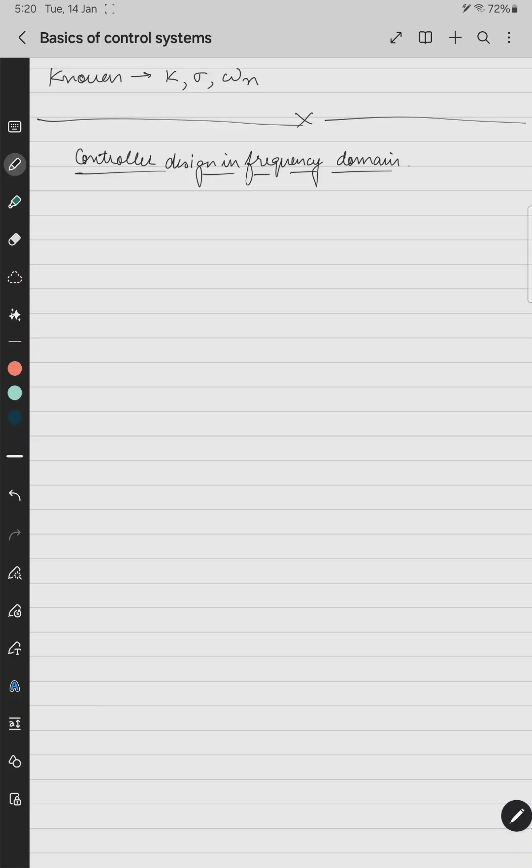In the last lectures we have seen how to design a controller in time domain, considering time domain specifications like a given rise time, a given settling time, a given overshoot, and based on these limitations, how to tune the KI and KP parameters for first order and second order systems. We have seen that by substituting some inequalities and solving them, we can get the desired converter response by ensuring that the closed loop response is stable, achieving the desired steady state error and desired transient responses - rise time, settling time, and overshoot.

We also know that as we go on increasing the order of the system or the plant, the inequalities become complex to visualize. For instance, for a second order system with a PI controller, it became overall a 3D graph, basically a 3D complex plane. So in this case, the controller design becomes slightly challenging.

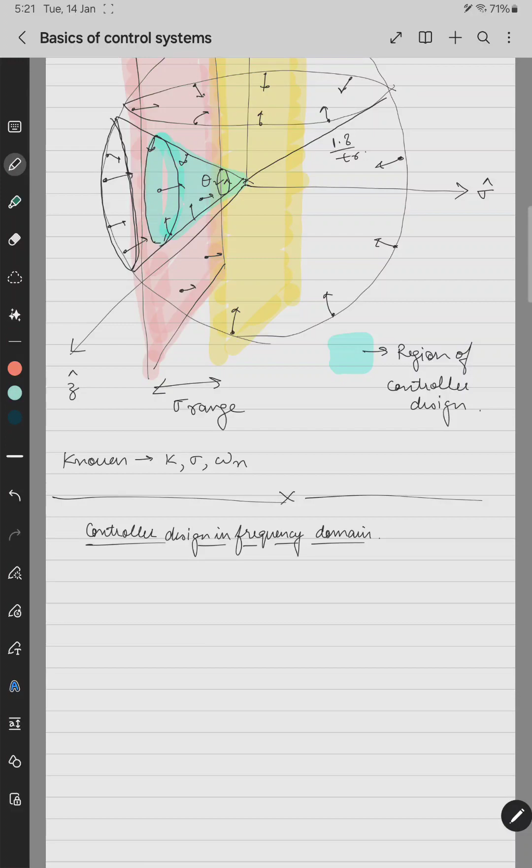That's why people prefer controller design in frequency domain, where you can design the KI and KP parameters by just assuming a given phase margin and bandwidth from the crossover frequency. So we'll start with today's lecture on frequency domain analysis - the methodology to tune the controller parameters using the OLTF.

Controller design is typically based on different methods, like root locus, then frequency domain analysis, which is also called loop shaping analysis or Bode plots. These are the two methods typically used for designing the controller. I think we've already seen in the bachelor's course how to use the root locus technique.

In root locus technique we use the closed loop controller, the overall transfer function for a closed loop system, and then match it with the characteristic equation, keeping the coefficients of all powers of S the same sign, then do some plots to find the KI and KP values. But frequency domain analysis is mostly preferred by power electronic engineers, so we'll be using frequency domain analysis.

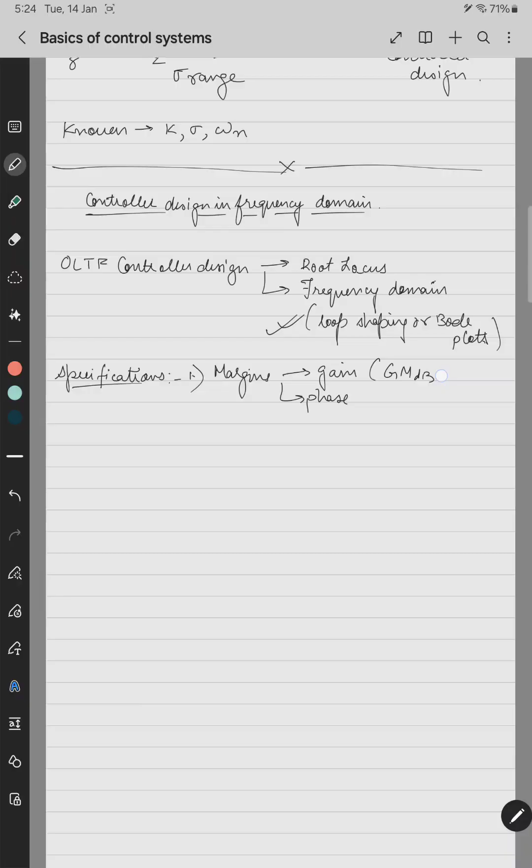So the specifications of frequency domain analysis: the first one is the margins - gain and phase margin. Gain margin is denoted by GM, either in decibels or in absolute scale, and phase margin is PM in degrees or in radians. These are basically the margins.

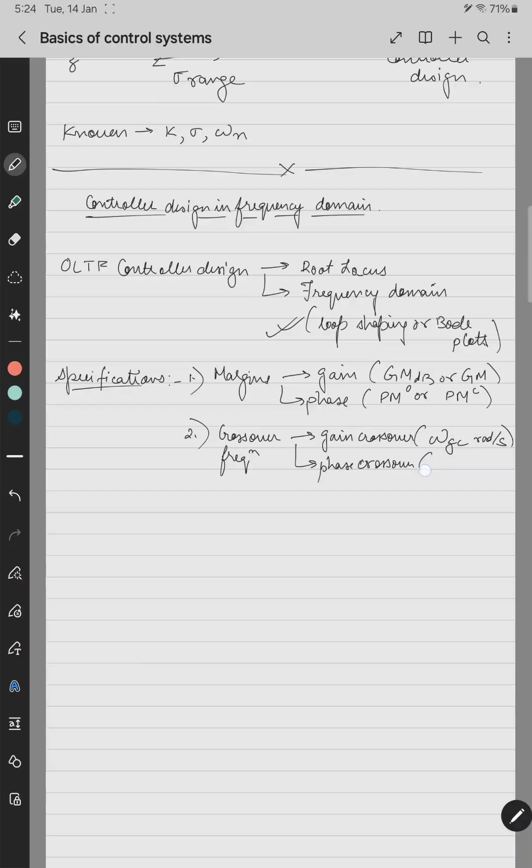The second thing is the crossover frequencies. First is called the gain crossover, omega GC in radians per second, and the next one is the phase crossover, omega PC in radians per second. The last one is the closed loop bandwidth, omega BW of CL. We'll quickly see the definition of these parameters. Let's say G of S is the plant transfer function.

So the first one is the gain margin. Actually, instead of margins, we'll first see the crossover frequencies. Omega GC is the omega at which gain crossover occurs, at which the mod of G of j-omega equals 1, or 20 log base 10 of mod of G of omega equals 0.

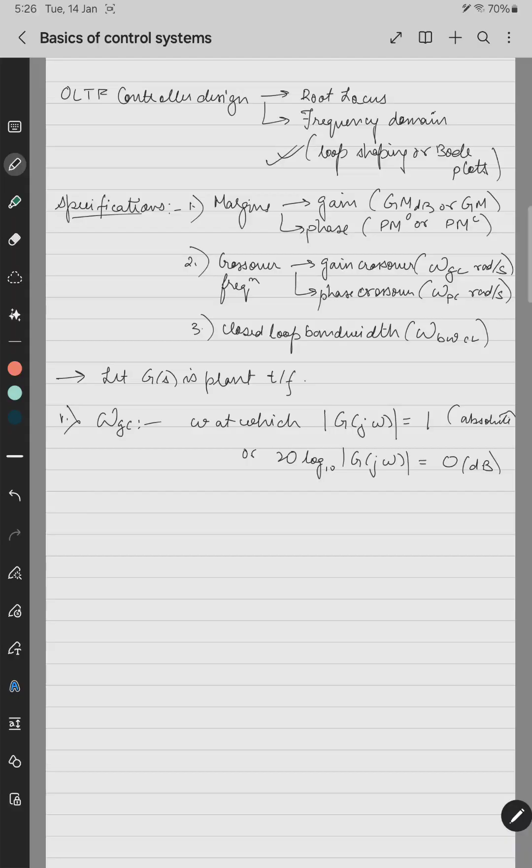This is in absolute scale, and this is in decibel scale - 20 log base 10, the semi-log scale - because in Bode plots we use the semi-log scale for the gain plot instead of the absolute unit. So the gain crossover frequency is the frequency at which the gain plot crosses the 0 dB line, or the value 1 on the absolute scale.

Then comes the phase crossover frequency. Phase crossover is the frequency at which the angle of G of j-omega-gc equals minus 180 degrees or minus pi radians. This is the frequency at which the phase plot crosses the minus 180 degree line, or minus pi in radians.

Then come the margins. First, the phase margin - the definition is the maximum phase that can be added to the plant, G of j-omega, so that the GCL of S, or G equivalent of S, the closed loop transfer function, remains stable.

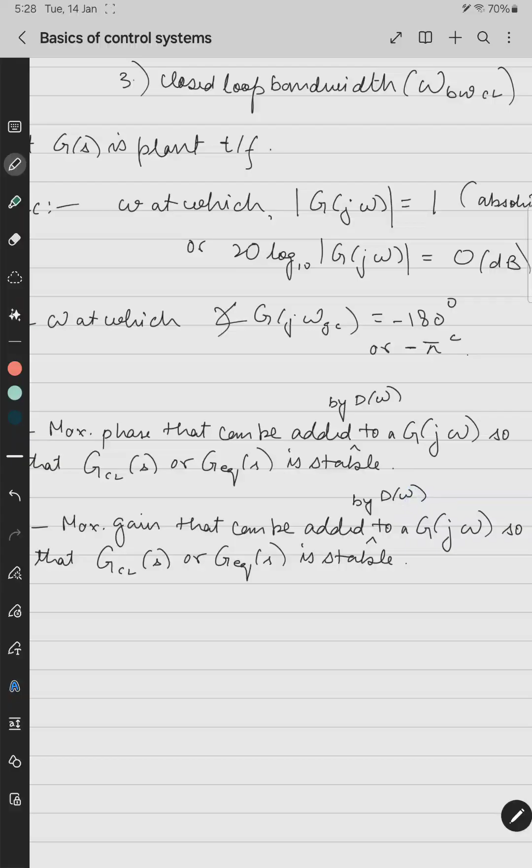Gain margin is the maximum gain that can be added to a plant so that its closed loop response becomes stable. What is the thing that adds the gain or adds to the phase to a plant? I'll write it as a controller d of omega, which can be added by d of omega. And the open loop transfer function OLTF is d of s into g of s. So I'll just pictorially represent what are the gain margin and phase margin.

So let's say g of s is, instead of k by s, I'll write 1 by 1 plus s into tau, where tau is basically the time constant of a low pass filter. So tau is a constant.

So if we write it as g of j omega and separate out the real and imaginary parts, it will be 1 by 1 plus j omega tau. If you multiply by 1 minus j omega tau on both sides, using a plus b into a minus b, a square minus b square becomes plus omega square tau square. So it will be 1 by 1 plus omega square tau square, minus omega tau into j by 1 plus omega square tau square. So what is the gain?

It is nothing but the square root of a square plus b square. So square root of 1 plus omega square tau square, divided by 1 plus omega square tau square whole square. So it becomes 1 by root of 1 plus omega square tau square, this expression.

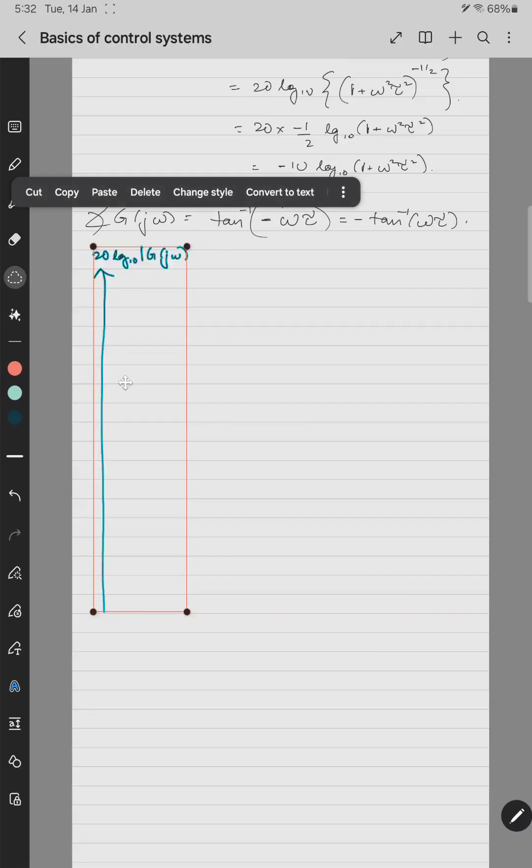Now in order to draw the frequency response plot of this first order plant or the low pass filter, this is 20 log base 10 of mod of g of j omega versus omega. On the same graph, this axis becomes omega, and this is angle of g of j omega. So we have to draw this.

Now what happens is that till this frequency, which is the cutoff frequency where omega equals 1 by tau, the gain will be almost constant, and after that it will start to fall with a slope of minus 20 decibel per decade, because it is a pole. 1 plus s tau is a pole, so the gain will be constant till this frequency, which we call the cutoff frequency, that is 1 by tau. After this it will start falling, so this slope is minus 20 decibel per decade, because it's a y versus x graph and the y axis is in decibel scale.

So the frequency at which the gain plot in decibels cuts to 0 is called the gain crossover frequency. Now let's quickly draw the phase plot of this, since it's basically a first order plant. So substitute omega equals to, initially say omega equals 0, then 1 by tau, omega gc, and some value.

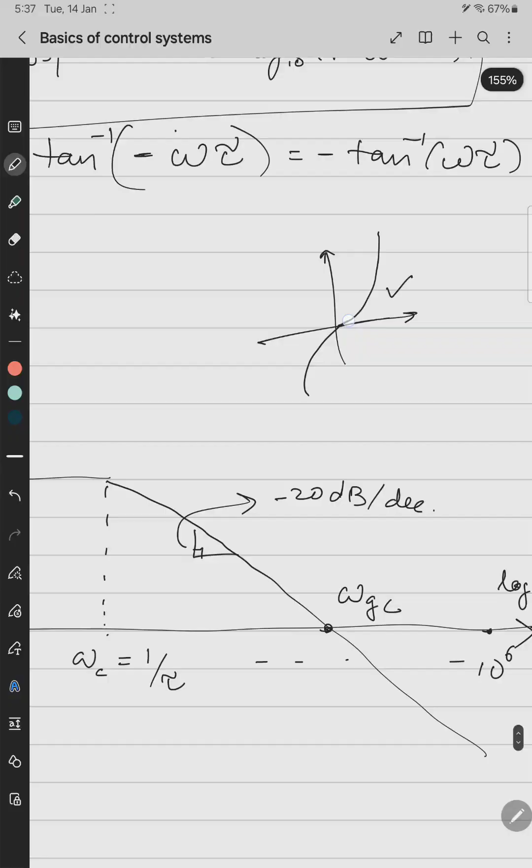So what happens for 10 to the power 0, what is the angle? Tan inverse of 0 is 0. So this is the 0 phase, 0 degree - it starts with 0. Tan inverse function is of this nature. Now we are taking tan inverse of omega - we are not taking this region, we are taking only this right hand side region. So it should rise in a quadratic or cubic term. Basically it's a cubic term, because we are not taking this side, we are taking this side.

This is tan inverse of theta, and this is theta - this is tan inverse of theta. But here the phase falls from 0, it becomes negative because it is minus of tan inverse. So basically multiply a negative sign, so minus tan inverse of theta is like this. It will be somewhat like this. That's why from 0 it is falling like this.

But at omega crossover frequency, meaning at omega gc as 1 by tau, so let's put omega as 1 by tau, so it will be minus tan inverse of 1. That is what angle? 45 degree. Correct - tan inverse of 1 means y equals tan inverse of 1, so tan y is 1. So what is theta? It is 45 degree.

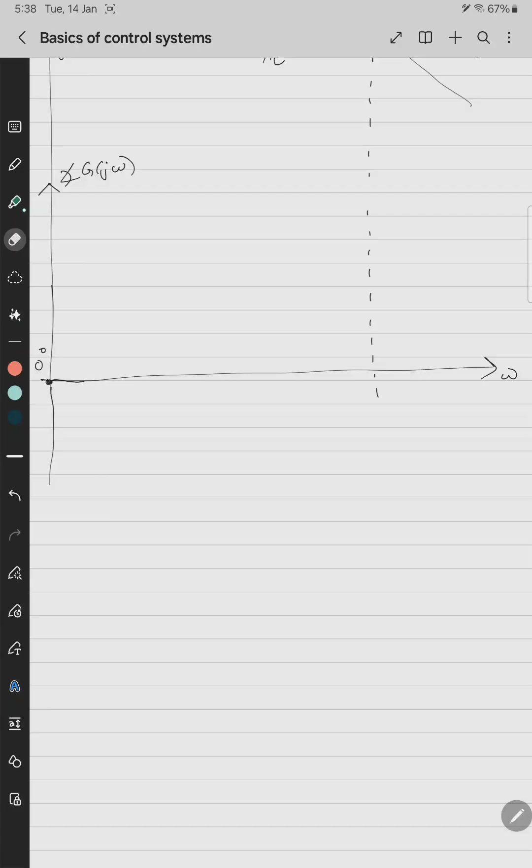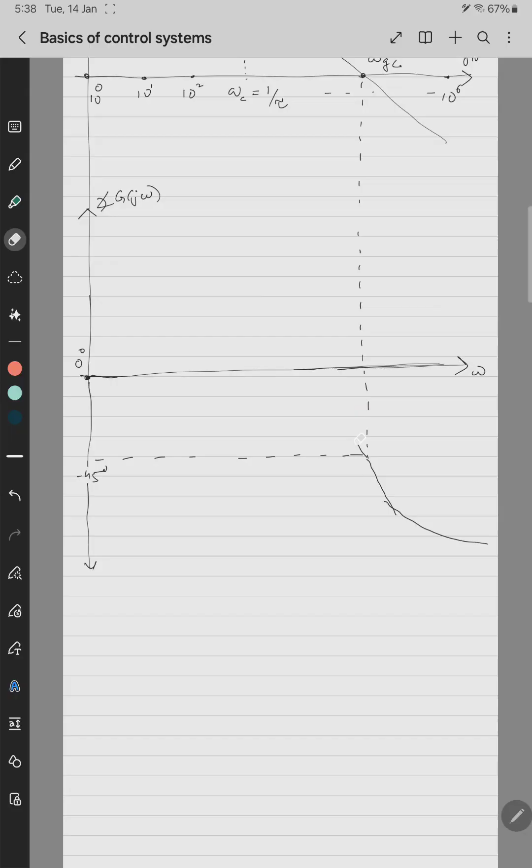So it is like this - it falls. It falls like this, so this is minus 45 degree. Minus 45 degree, and it goes down. And then what happens? As omega becomes infinity, it becomes parallel to this axis. Similarly, it should become parallel to this omega axis. So it will be like this. Okay, I think it's not drawn properly - let me redraw it again.

So it becomes parallel to this. At infinity, what is the angle we have to see? Minus tan inverse of infinity - so what is infinity? When tan becomes infinity, when the denominator becomes 0, so when cos becomes 0 at 90 degree. So it is minus 90 degree. This point is minus 90 degree, this is minus 45 degree, and this is 0 degree. So this is the phase plot - this is the phase plot and this is the gain plot. So this is the gain crossover frequency, and phase crossover frequency is where it cuts minus 180 degree.

Here, so this becomes minus 180 degree - draw a parallel line to this. So this is a special case where this graph does not touch minus 180 degree - it touches infinity. So in this case, omega pc is infinite because it is almost parallel to it. The phase plot does not cut the minus 180 degree line. Phase crossover frequency is infinite. Gain crossover frequency is 1 by tau.

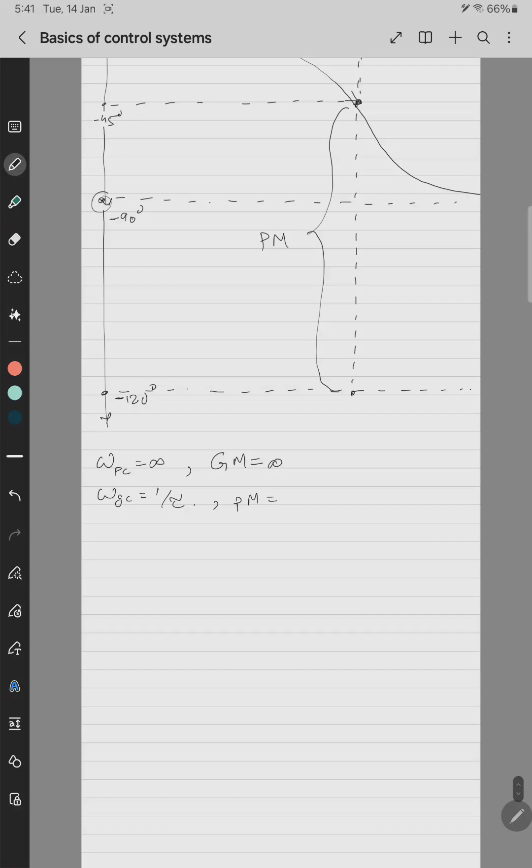At gain crossover frequency, what is the phase margin? Phase margin is this minus this. I'll draw an arrow like this. This is the phase margin. The significance of the arrow is this value minus this value. So minus 45 degrees minus minus 180 degrees, so 180 minus 45, which will be 135 degrees. Positive. Phase margin is positive. Gain margin is infinite. So this is the example of gain margin and phase margin.

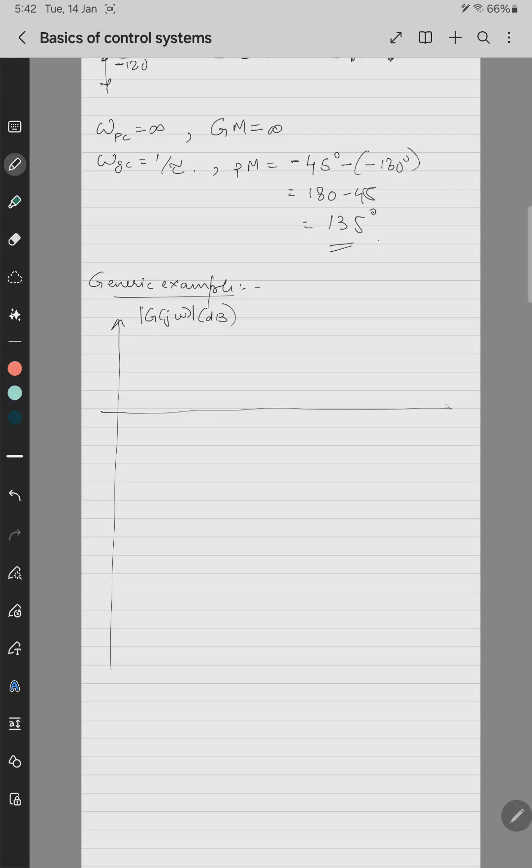Let's see another, a generic example. Let me draw this. This is mod of g of j omega in decibel, meaning it is understood to be in decibel, and this is log of omega. It cuts and somewhere it falls straightly, and then again it becomes flat. Similarly, this is the angle of g of j omega versus omega. So it is like this.

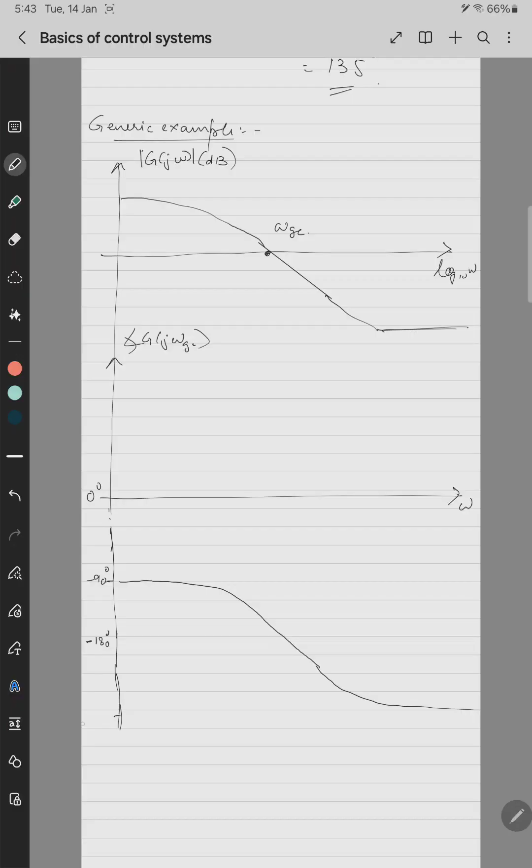This is the gain crossover frequency, and say this is 0 degree, minus 90 degree, minus 180 degree. Say it starts from minus 90 degree, cuts through, and then at minus 270 degree it becomes constant. Say this is just an example. Minus 270 degree is this thing, meaning it becomes flat at this point.

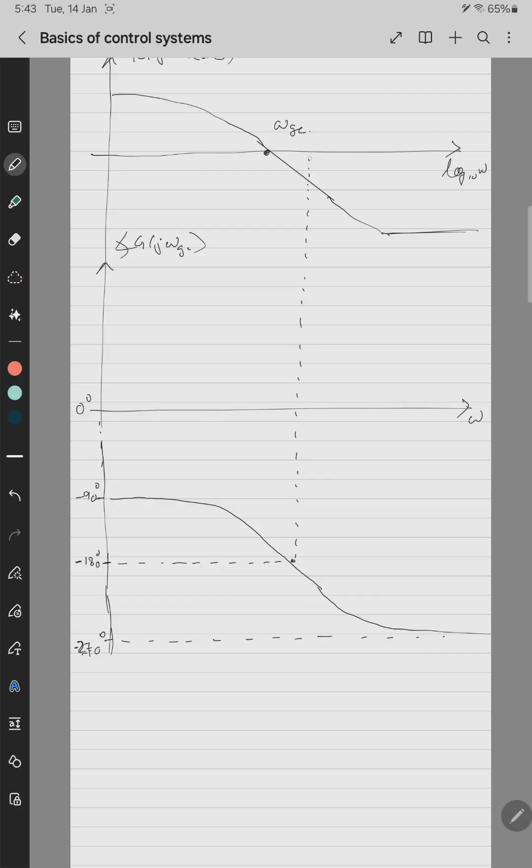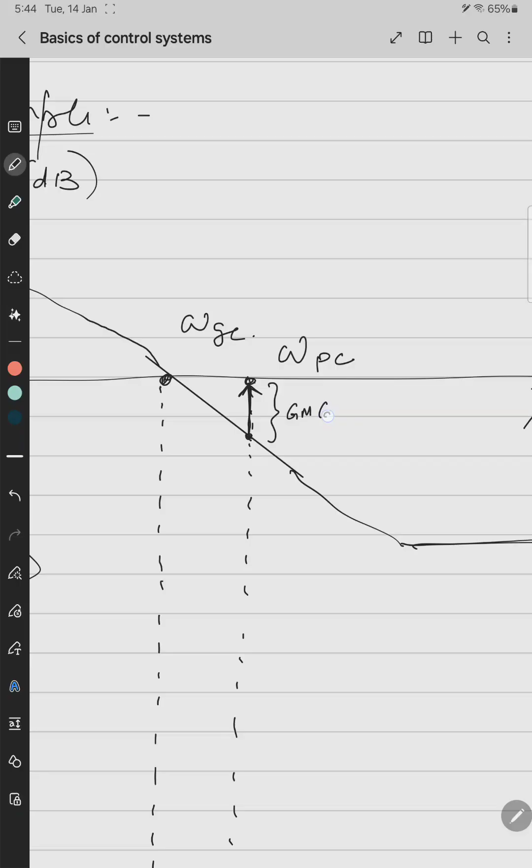So at minus 180 degree, see where the point cuts it, extend it upwards for the gain margin. This is the frequency at which the phase plot cuts the minus 180 degree line, so this point will be the phase crossover frequency. So from gain crossover frequency, extend this graph down and see where it cuts the phase plot, and see how much it is above minus 180 degrees. This will be phase margin in degrees, and similarly this will be gain margin in decibel. So this is the classic generic example of it.

Let me quickly write: omega gc is where 20 log base 10 of mod of g of j omega, where omega is omega gc, becomes 0. At phase crossover frequency, angle of g of j omega pc becomes minus 180 degree. Or you can write it as omega, where omega equals omega pc, like this. Then for gain crossover, the phase margin.

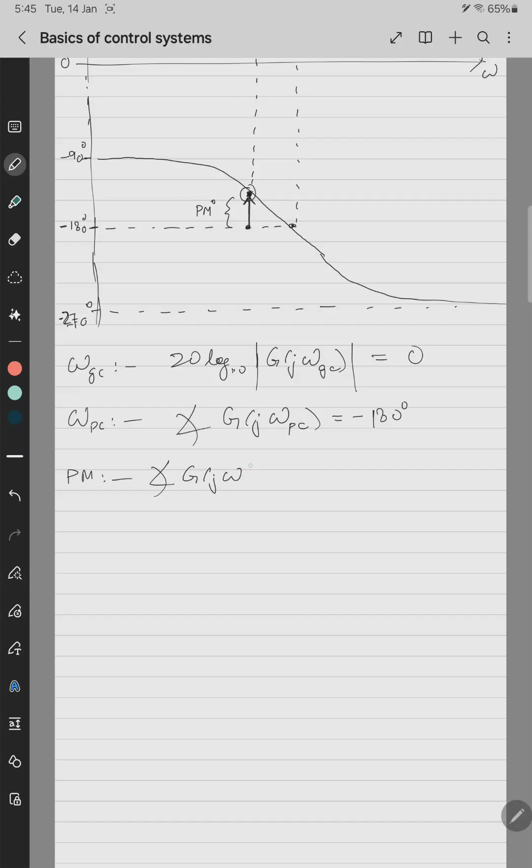Phase margin is what? This point minus this point. What is the first point? The arrow indicates subtract this from this. So what is this point? This point is angle of g of j omega. But what is omega, what is the frequency? Extend the line up, it is omega gc. So angle of g of j omega gc minus minus 180 degree, so it will become plus 180 degree. So this is the phase margin.

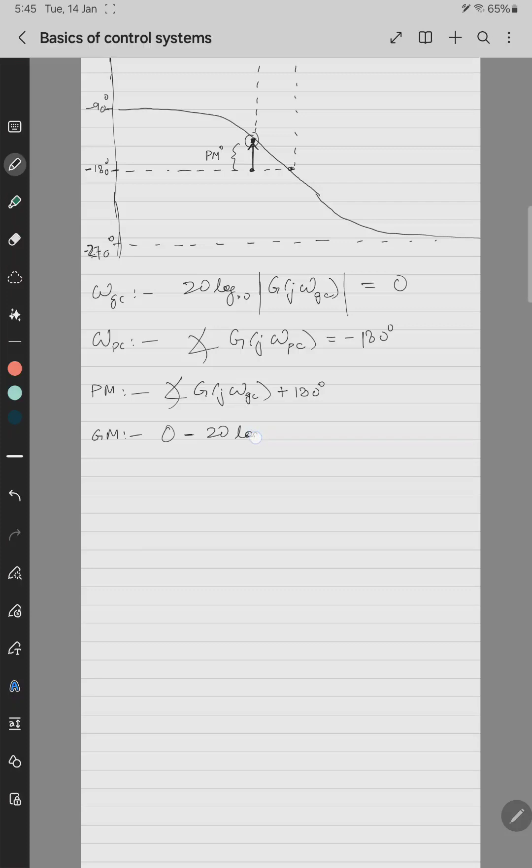Then gain margin, what is gain margin? Again, this arrow, this point minus this point. What is this point in decibel? It is 0 decibel. And what is this point in decibel? This point is 20 log base 10 of this and this, so it becomes 0 minus 20 log base 10 of mod of g of j omega. Now what is omega? Gain margin is at phase crossover frequency, so omega pc.

So these are the definitions of gain and phase margins. Whenever I say the words margins or crossover frequencies, as of now I've considered only a plant, so I know the model of a plant. I have considered a first order plant. I have put s equals to j omega, taken the real and imaginary parts, plotted the gain plot as semi-log versus log axis, and it came out to be a straight line after this cutoff frequency. So omega c is called the corner frequency.

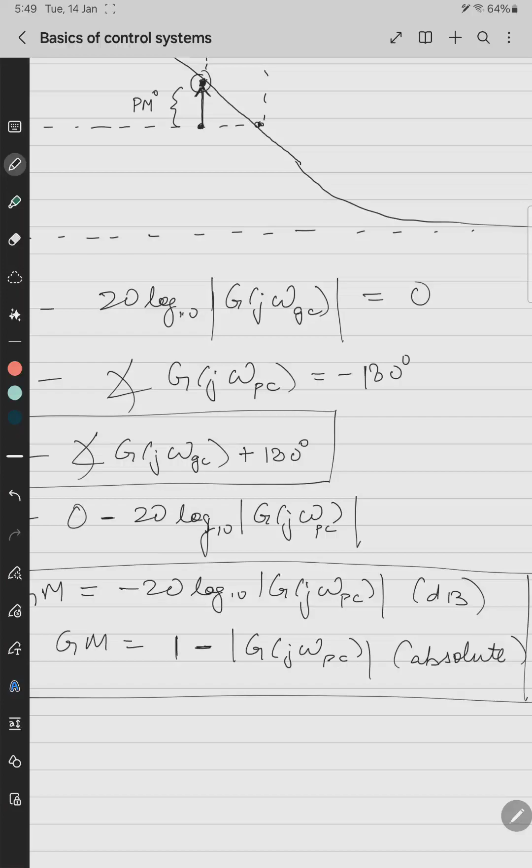Gain margin means this much is the margin, meaning this much gain you can add in decibel. And what is the thing that adds the gain? A controller adds the gain. So d of j omega should add that gain at omega pc.

Similarly, phase margin is the angle of d of j omega. What should that be? That is the maximum of this.

So I can write this: 20 log base 10 of mod of d of j omega, first at the gain margin, so at phase crossover frequency. This should be less than or equals to gain margin in decibel. What I said, gain margin is the maximum gain which can be added by the controller. Maximum means less than or equal to, at the phase crossover frequency.

So I'll write mod of d of j omega pc should be less than or equals to gain margin in absolute, like this much gain I have to add.

Similarly, angle of d of j omega at gain crossover frequency means phase margin at gain crossover frequency. So angle of d of j omega gc should be less than or equals to phase margin in degrees. This is in degrees.

So this is the requirement of a controller, because margin means the value up to which you can add gain and phase at some known frequencies. So omega gc and omega pc are known frequencies.

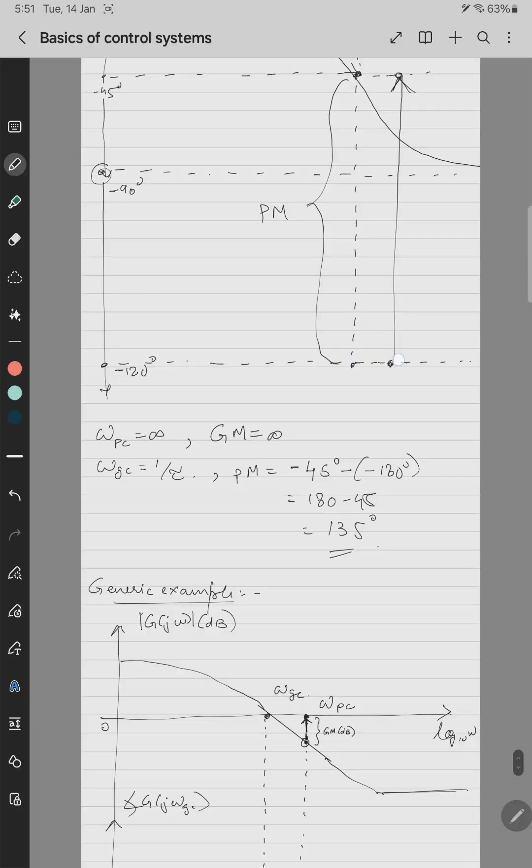Now one more thing: should we consider gain margin or phase margin or both while designing the controller? In this classical example of a first order plant, the phase crossover frequency is infinite, so gain margin is undefined. Instead of writing undefined, I'll write infinite - I'll write undefined.

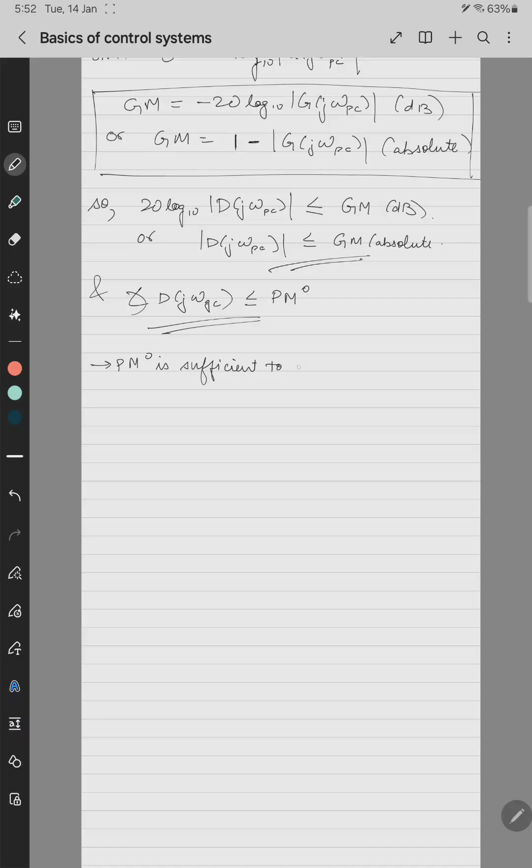So basically phase margin is sufficient to design the controller. There should not be a strict restriction that you should also work on gain margin. Phase margin is sufficient because of this term, because of this special case.

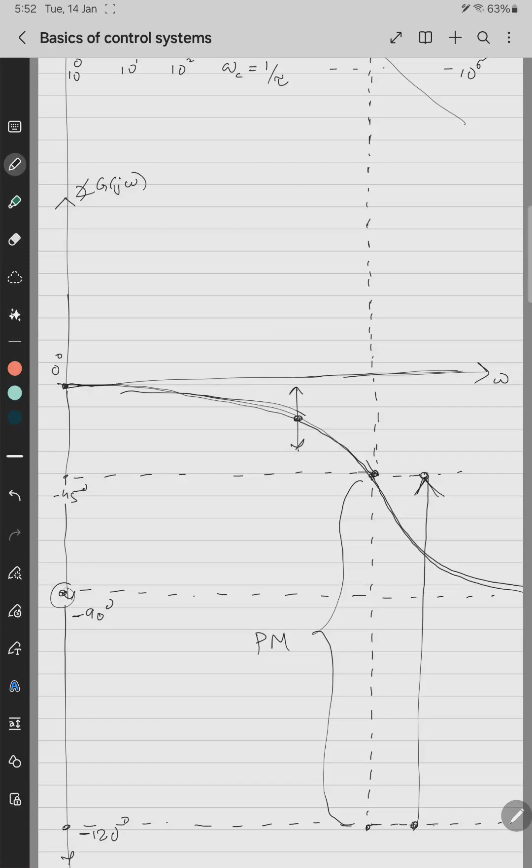So why? Because the phase plot may or may not go up to 180 degrees. Now what is the thing that rolls or shifts the graph vertically? Let's say this is the phase graph. What is the thing that will shift this graph up and down? It is nothing but the integrator action.

So omega equals to 1 by a. There are three corner frequencies: omega equals to 1 by b and omega equals to 1 by c. Three corner frequencies - 1, 2, 3: 1 by a, 1 by b, 1 by c.

So it means there are 4 regions. There are 4 terms here on the pole side. Let's say the zero side is a constant. Or let's have something on this side also: s plus a1, s to the power n, s plus b1 into s plus c1. Then we have 1 by a1, 1 by b1, 1 by c1.

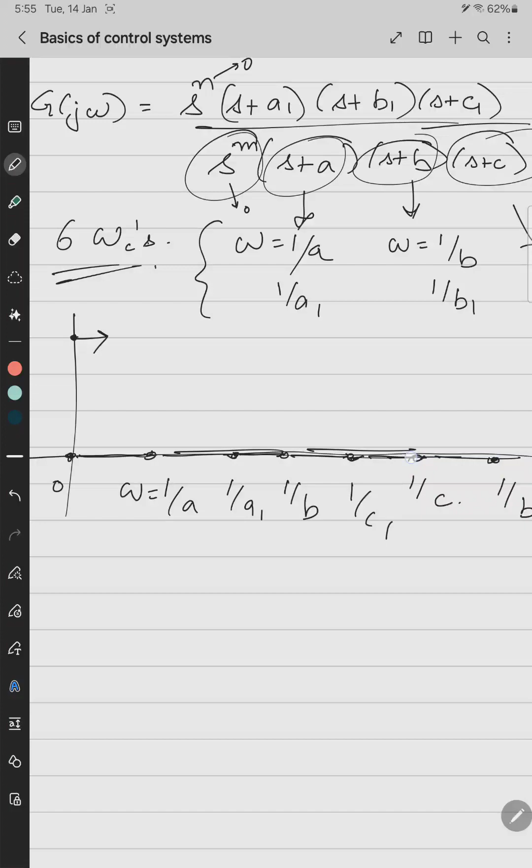And this s to the power m, what is it? It's 0. S equals to 0 and s equals to 0, so 0, 0 will coincide here only. So how many regions are there? 1, 2, 3, 4, 5, 6, and the next one is 7. There are 7 total regions.

At these different regions, the effect of each term will be dominating like this. So between this and this, which term will be dominating among the above terms and which will be taking over, like this it will be there. So from 0 to 1 by a, what happens?

Obviously m has to be greater than or equal to n for a proper transfer function. I hope you all know this proper transfer function. So m has to be greater than n. So s to the power m minus n term will dominate here.

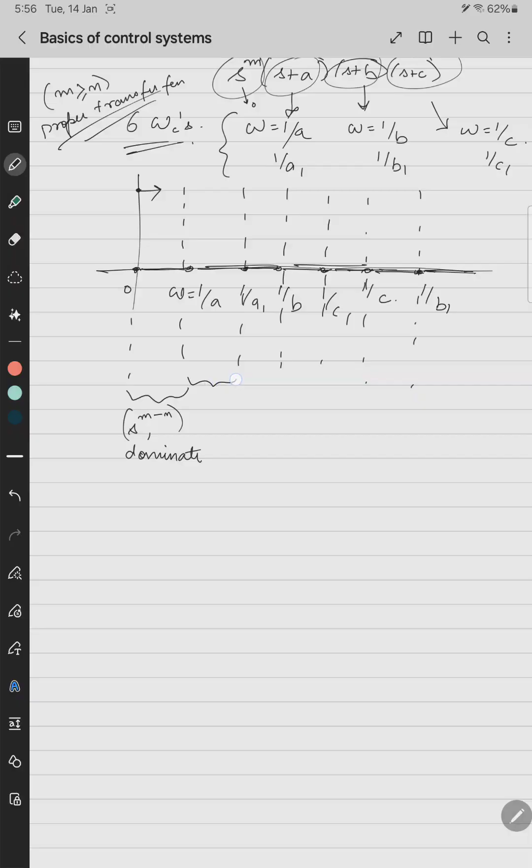Okay, then between a and a1, basically it will dominate here. So basically the gain plot will have no slope, it will have some constant slope, and it will start at some frequency.

Say omega equals to 0. Substitute s equals to 0, omega equals to 0. It will start from infinite, right? From infinite it will start like this, some infinite. That means it is placed at a very far distance here. It will start from here.

After that, what is the effect of the s to the power m minus n term? It has to be a constant gain, so it will be like this. Then after this we have to see the effect of which term is dominant.

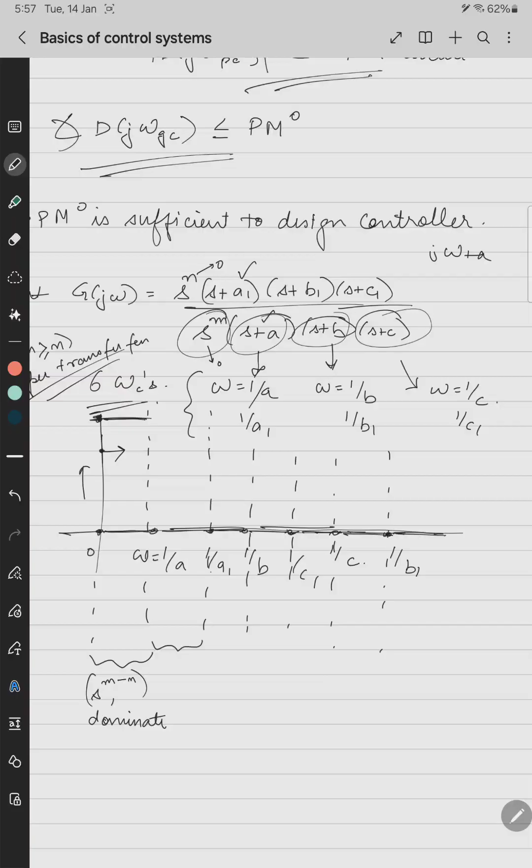So it's between 1 by a and 1 by a1. Take this term and this term. Now you see which is greater than which, and whose slope will be valid. Say a1 is greater than a, meaning the effect of a1 is greater than a, then the effect of the zero will be more than the pole.

So what happens? The overall slope will be slightly rising like this. And then similarly, in the next case, a1 and b: b is greater than a1, so again the effect of this will be rising like this. So basically the effect of the pole will dominate, so it will be rising and then falling at the slope of minus 20 decibel per decade. Similarly, this is how you have to think and plot the gain plots.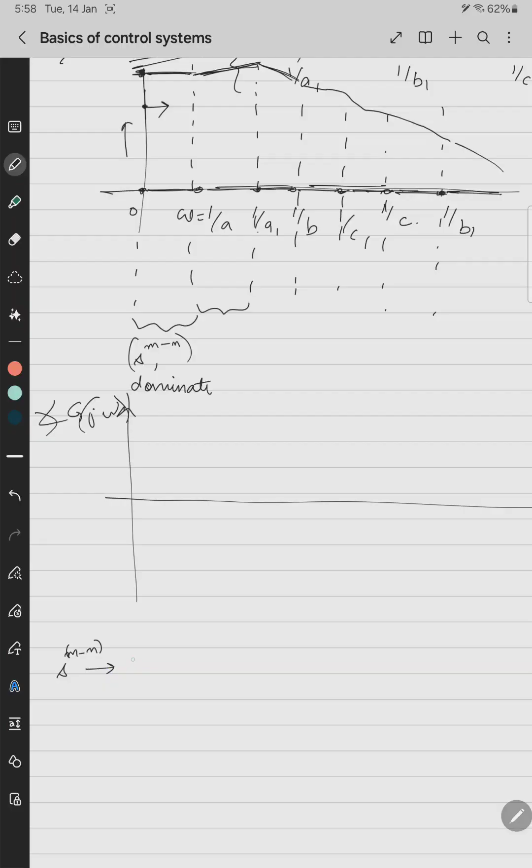Similarly for a phase plot, angle of G of j omega, you have to see how many terms there are. So for the s to the power m minus n terms, it will be minus 90 into (m minus n). I'll tell you what this means. If m minus n... okay, I'll make a table directly.

M minus n, and here I'll write starting phase. If m minus n is 0, meaning m equals n, it will start from 0 degree. If m minus n is 1, it will start from minus 90 degree. If m minus n is 2, it will start at minus 180 degree. 3 means minus 270 degree, 4 means minus 360 degree or 0 degree, and then it goes on repeating.

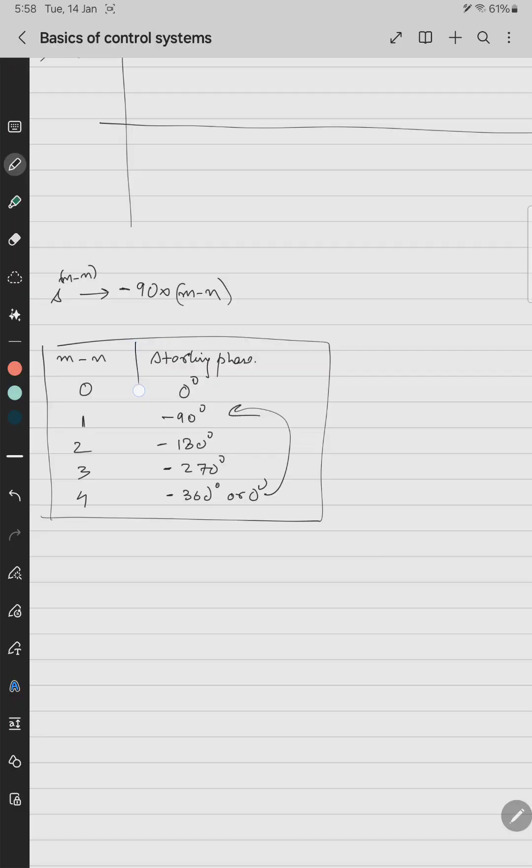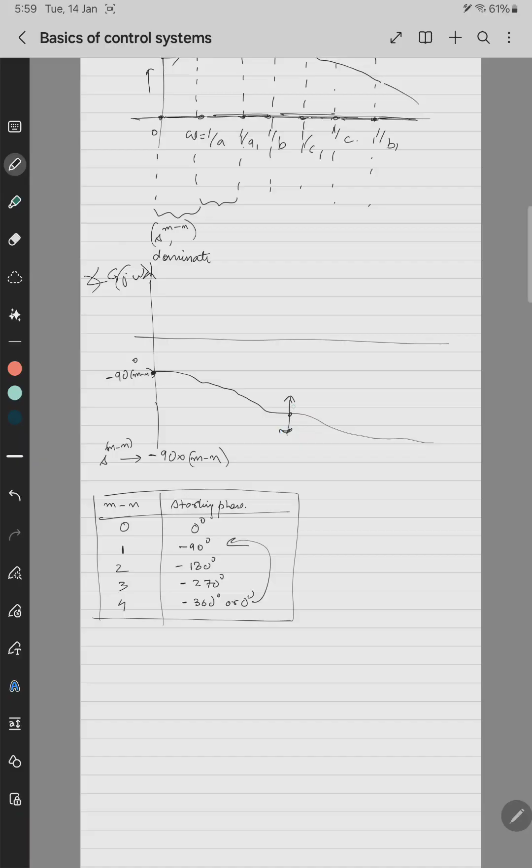This is the thing you should take into consideration. So starting means at what point? This is minus 90 into (m minus n) in degrees, and then based on this, tan inverse of a by... like this you have to do. So based on this, you have to draw the phase plot, and then shift it up and down. By what value it shifts up or down depends on the m minus n value.

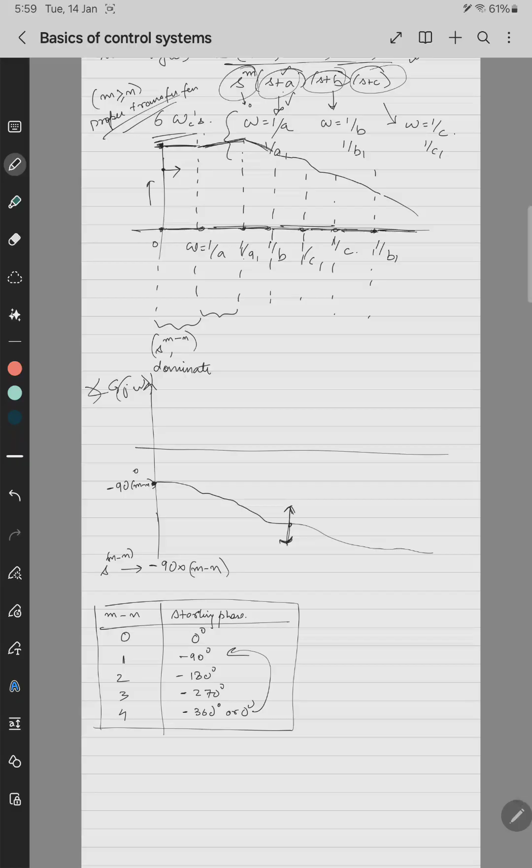So the reason for giving you an example of this type of transfer function is to give you a basic idea of how to draw the Bode plots, gain and phase plots, and also to prove why gain margin is not very essential, because m minus n can be 0. So the overall phase plot may not cut the minus 180 degree line, so the gain margin may be undefined. So even if the gain margin is undefined, you can still design a controller and ensure stability. So enough phase margin is enough to decide the stability. That was the whole idea of this.

So now we have seen gain margin, phase margin, and this. For a given plant, I think you can draw any first order or second order plot and draw the Bode plot, and then basically it's a tan inverse function. So you have to see how to bend the tan inverse function and accordingly draw the Bode plots.

So now we start with the aspects of the controller.

As usual, controller design means the same three aspects which we saw in the time domain. First is the stability.

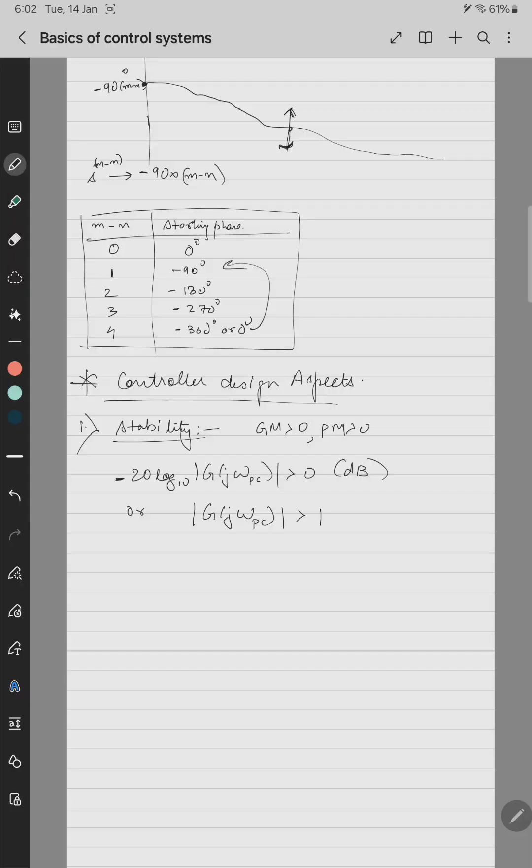For stability, gain margin should be positive and phase margin should be positive. Means 20 log base 10 of mod of G of j omega, gain margin, is at phase crossover frequency. This has to be positive, or in absolute terms, in decibel, mod of G of j omega at omega PC has to be greater than 1. I'm sorry, there is a negative sign here, because gain margin is negative, minus 20 log at omega PC. So then the inequality will be reversed. So I'll directly write, instead of this, it should be less than 1 in fraction, this is in absolute.

And phase margin is angle of G of j omega at gain crossover frequency plus 180 degrees, should be greater than 0. Therefore angle of G of J omega GC should be greater than minus 180 degree. These are the conditions of stability in this controller design approach.

And what is gain margin? Again we can write, gain margin means whatever gain that is added by the controller. We'll write 20 log base 10 of mod of D of J omega PC, the maximum value of it, that is the gain margin. Like this I'll write, phase margin equals to angle of D of J omega GC, maximum of it, because margin is the maximum thing which you can add. Okay, so first, stability, is done.

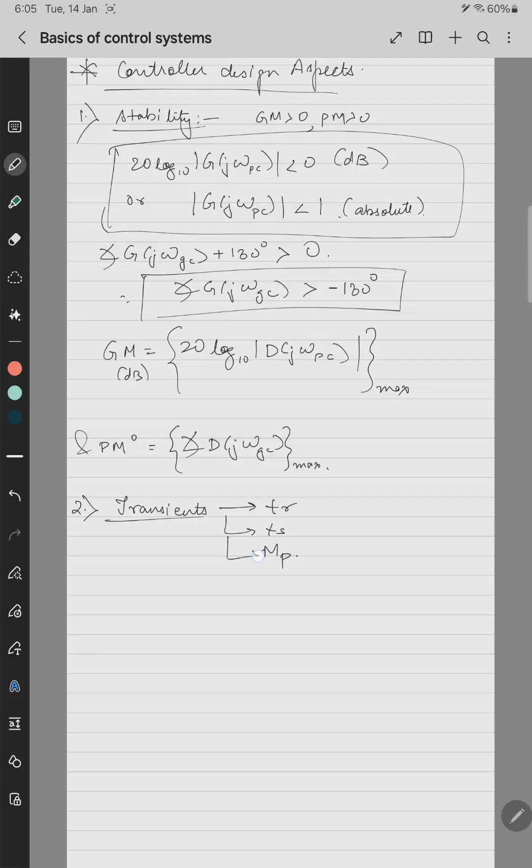I'll directly go to the second aspect, transients, that is rise time, settling time, and peak overshoot. Then, how to correlate these three points with our frequency domain characteristics. So I'll write time domain specification. What are the time domain specifications? Rise time, settling time, peak overshoot. And what is the frequency...

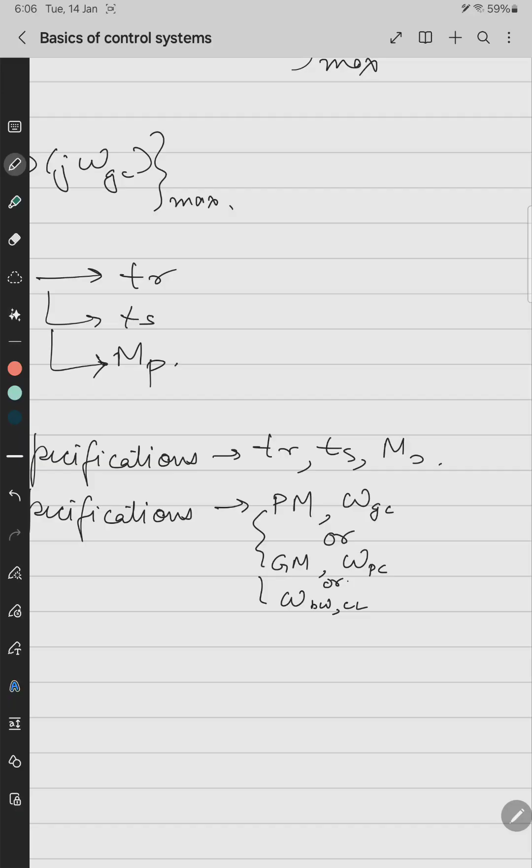Frequency domain specifications are phase margin, gain crossover frequency, or omega bandwidth of closed loop, and maybe gain margin. Because gain margin and omega PC are related to each other, either you should know phase margin comma omega GC, or you should know gain margin comma omega PC, or both. Okay, I think I made a confusion here. Let's erase it. This or gain margin comma omega PC, this or this, and omega BW CL. Sorry, this also goes in OR. Let's see, bandwidth is not needed. Bandwidth is for closed loop, so this frequency domain analysis is only for open loop, meaning loop transfer function analysis.

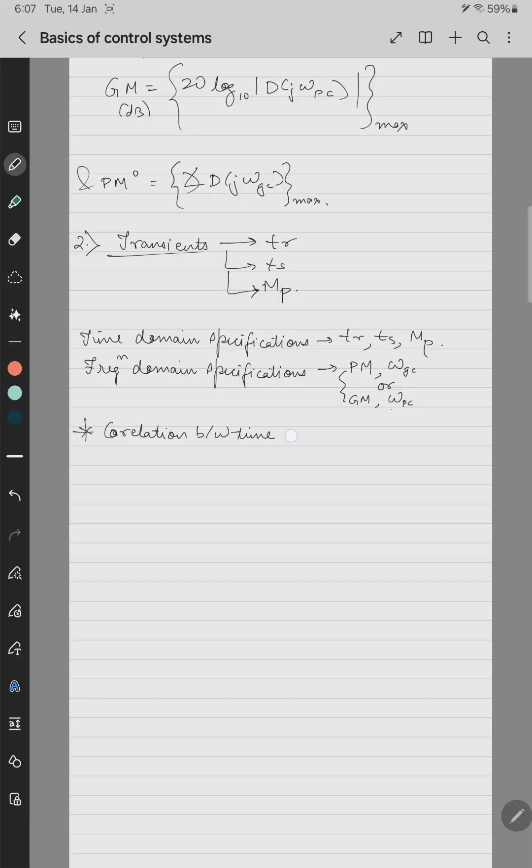So these are the time domain and frequency domain specifications, and we will know how to correlate them. So I'll write correlation between time domain and frequency domain parameters, specifications. We'll see how to correlate each other. The value of Kp, Ki will be same in both cases, but given the controller is designed using different design approaches, what is the correlation between their respective specifications or respective parameters?

Okay, so what we see is that rise time, settling time are a function of phase margin. But what is the function, how they vary, that we'll see. Now also zeta, damping factor, you can write zeta for a second order plant. That depends. Okay, so let's take an example of a second order plant.

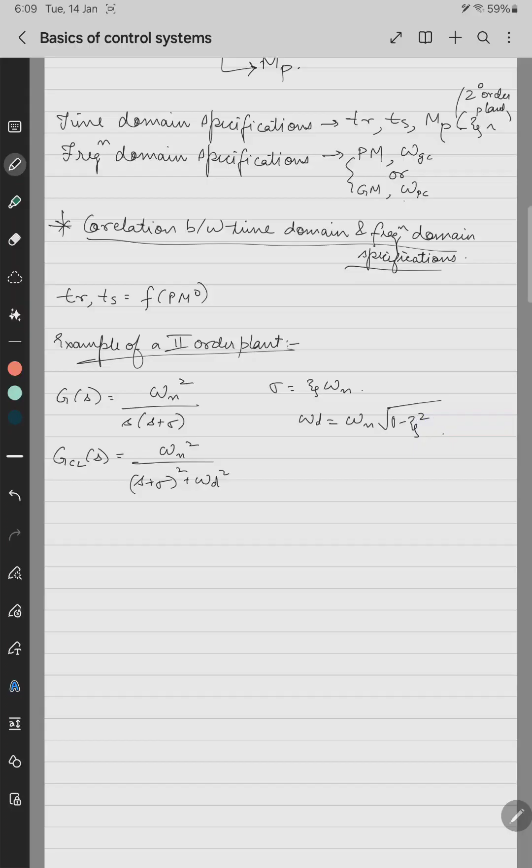The second order plant example which we took in the last class, that is omega n square by s square plus 2 zeta omega n plus omega n square, that is the closed loop response of that plant using unity feedback and without any controller. So I'll write G of s will be omega n square divided by s into s plus sigma, where sigma is zeta omega n. This is the normal transfer function of a second order plant. Now GCL of s is omega n square by s plus sigma whole square plus omega d square, where omega d is omega n under root of 1 minus zeta square. This is G of s without controller.

GCL, this is the GCL of S and this is G of S. So the second order plant should be this when I say a second order plant. So then we'll see what are the crossover frequencies and then margins. So first we'll find omega.

Gain crossover frequency. For omega gain crossover frequency, what is the thing? Mod of G of j omega. Okay, first let's calculate the margins.

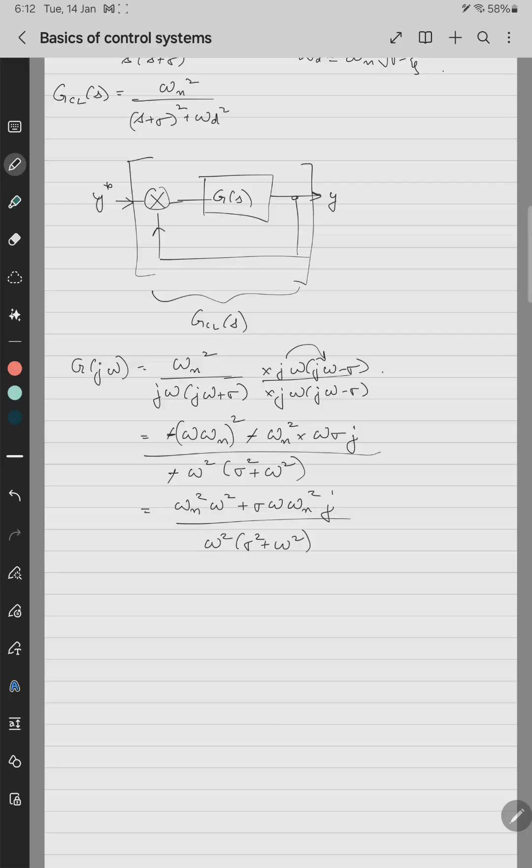It will be a square minus b square, sigma square plus omega square. So what happens? The minus will get cancelled, so it will be omega n square plus sigma omega n square j divided by omega square into sigma square plus omega square. So it will be omega n square divided by sigma square plus omega square plus...

sigma omega n square by omega into sigma square plus omega square into g of j omega, and the angle will be tan inverse of... this will get cancelled, this will get cancelled, so it will be tan inverse of sigma by omega.

And from this, what is mod of g of j omega? It will be under root of omega to the power 4 plus sigma square omega to the power 4 divided by omega square into sigma square plus omega square. So it will be...

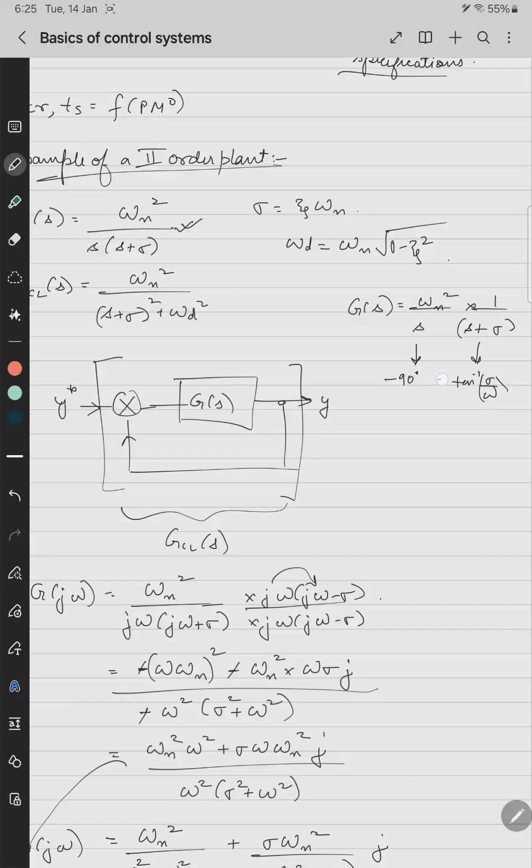Actually, there is some problem here. It should be minus 90 degree minus of this. Why? Because g of s you can write as omega n square by s into 1 by s plus, I think it is 2s plus sigma. So angle of this is minus 90 degree and angle of this is tan inverse of sigma by omega, minus sigma by omega. So just add this. So there is some mistake, it should be minus 90 degree.

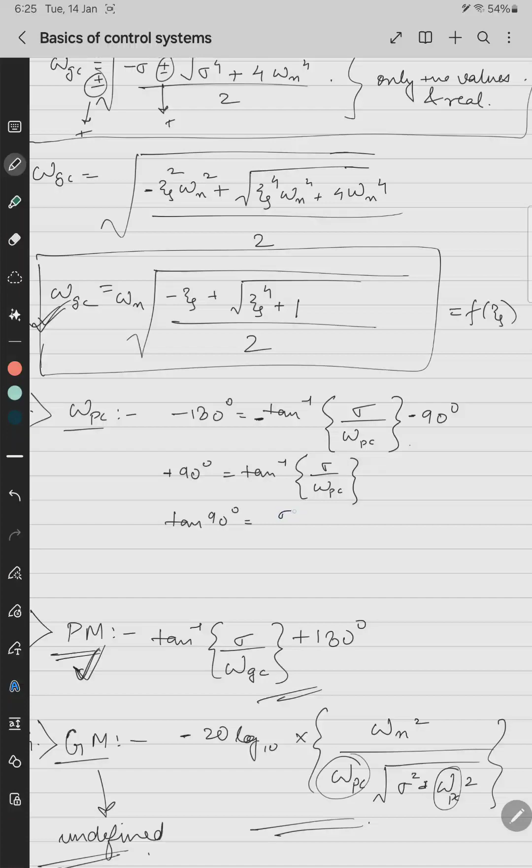Minus 90 degree. So it becomes like this: minus 90 degree or plus 90 degree equals to tan inverse of sigma by omega pc. So tan 90 equals to sigma by omega pc. So sin 90 by cos 90, this becomes infinite. So omega pc almost tends to 0, like this.

Similarly here, if you put infinite here, it will always tend to 0. Here it will be 0. So again, gain margin and phase crossover frequency are optional to take. You can take gain margin and gain crossover frequency and phase margin.

So here also the phase margin becomes 180 degree plus this, so minus 90 degree and minus this. So it becomes, I'll just shift it down, it becomes 90 degrees minus tan inverse of sigma, where sigma is zeta omega n by omega gc.

This becomes the phase margin in degrees. This is the phase margin and this is the gain margin. So we have correlated phase margin and gain margin as a function of zeta. But this overshoot is exponential of minus pi zeta by under root of 1 minus zeta square.

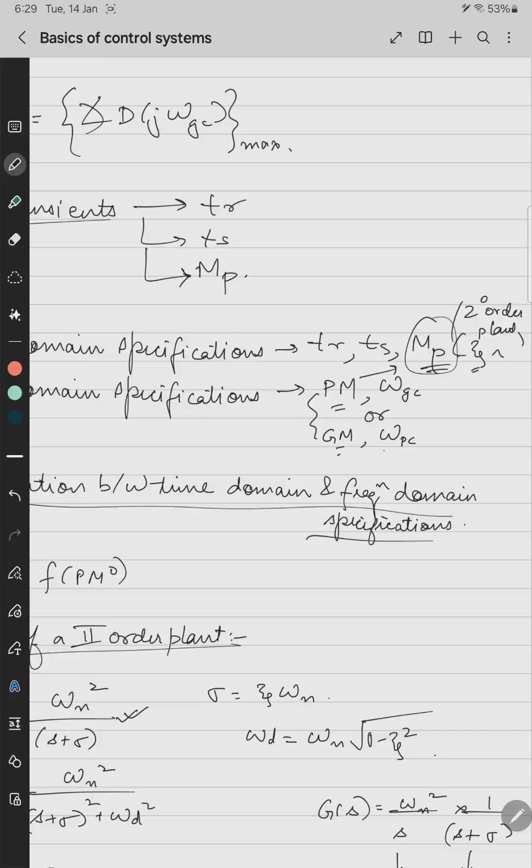So if you substitute here, they'll also become a function of overshoot, because overshoot is a time domain specification. Overshoot here, zeta is optional, so we have related the gain margin and phase margin with the overshoot, and similarly we can relate with the rise time and settling time. So for rise time and settling time we should do the closed loop response. Here we are doing only the loop transfer function or only of the plant.

Now we know for stability, the phase margin and gain margin has to be positive, but what should be the maximum value of phase margin? The maximum value of phase margin depends on the plant.

So PM minimum equals 0, and PM max depends on the plant, on the plant transfer function. So it can be in the range of 0 to 90 degrees, 0 to 45 degrees, or 0 to 180 degrees.

Let's say if the plant transfer function is only a simple gain, in that case the phase will always be 0 degree. So the phase margin will be minus 180 degree, 0 minus of minus 180, it will be plus 180 degree. So you can add 0 to 180 degree phase using the controller.

So it depends on the plant. PM max, let's say it's a gain, so it will be 180 degree plus 180 degree. So you can write 0 is less than phase margin is less than 180 degree. Maximum possible phase margin is 180 degree, that is when the transfer function of plant is a constant unity gain only.

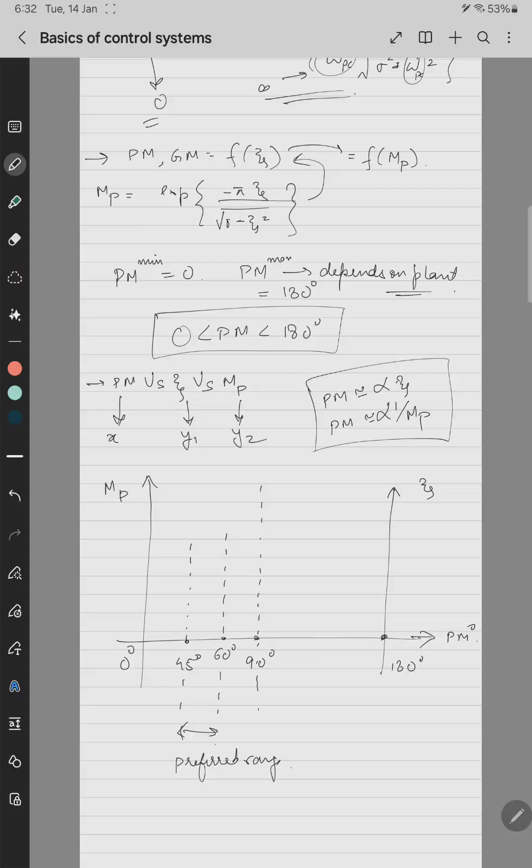Preferred range, so phase margin versus zeta. Phase margin, you can write as almost directly proportional to zeta, and phase margin almost inversely related to peak overshoot using this formula MP. First, phase margin versus zeta formula is this.

Substitute zeta with MP using this equation 2 and 1. Solving 1 and 2, you can get the relation between phase margin and MP, and just approximate that in some small range of angle. Then you will observe, okay let me change the color.

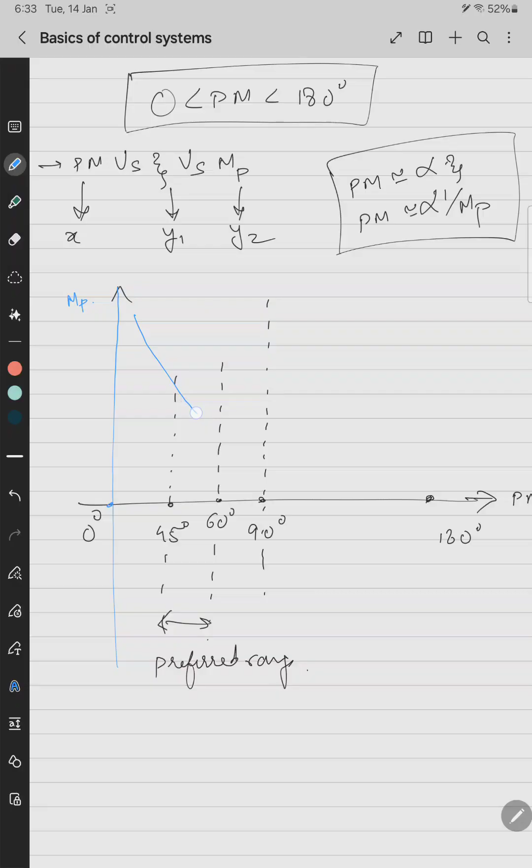Let me do this color. This is 0 degree. This is MP. So MP versus phase margin falls like this. And this is for zeta, for zeta it rises like this.

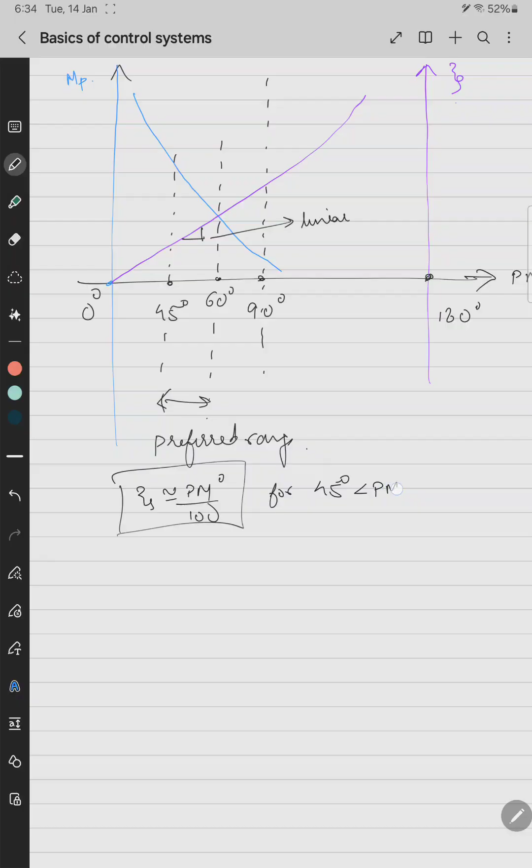So this is almost constant, almost linear in this range. So basically zeta, you can almost write phase margin by 100, phase margin degrees by 100, using this identity, for 45 degree less than phase margin in degree less than 60 degrees. Basically this range is preferred for control of power electronic converters. This is just an approximation of this thing. So this is how we correlated the time domain specification with the frequency domain specification.

D of S into G of S divided by 1 plus D of S into G of S, where G of S is omega n square by S into S plus sigma. This we have to put, and D of S is say Kp. So Kp plus Ki by S, SKp. So Kp S plus Ki by Kp, like this we'll write.

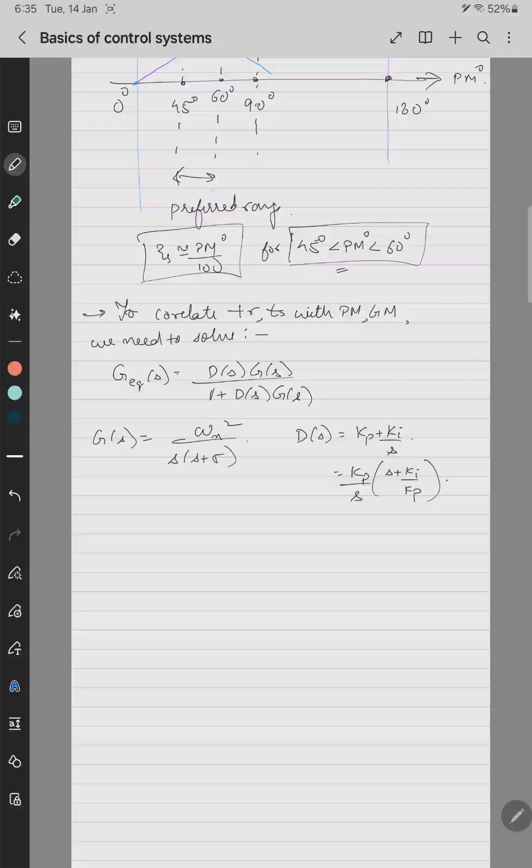Sorry, Kp by S, SKp plus Ki, so Kp out, S plus Ki by Kp. Yeah, this is the controller.

And then after first D of S is this, D of S is this. Then what you have to do to tune the controller and find Ki, Kp, you should know. Then for this G equivalent of S, you have to plot the response in time domain, measure its rise time and settling time, and then substitute, basically then you can find its correlation with the Kp Ki parameters.

So ultimately what happens is Kp, Ki are a function of phase margin, gain crossover frequency, and which are a function of rise time, settling time, peak overshoot. This is for frequency domain. This is for time domain.

So how to get Kp, Ki as a function of TR, TS, MP, which we already saw in the last lectures for controller design in time domain. Now how to find Ki, Kp as a function of phase margin, omega GC, this we are doing right now in frequency domain. And how these are related is what we saw just now. We correlated phase margin, gain crossover frequency with MP, overshoot. We can correlate that with TR and TS also, but for that we have to do some additional computation.

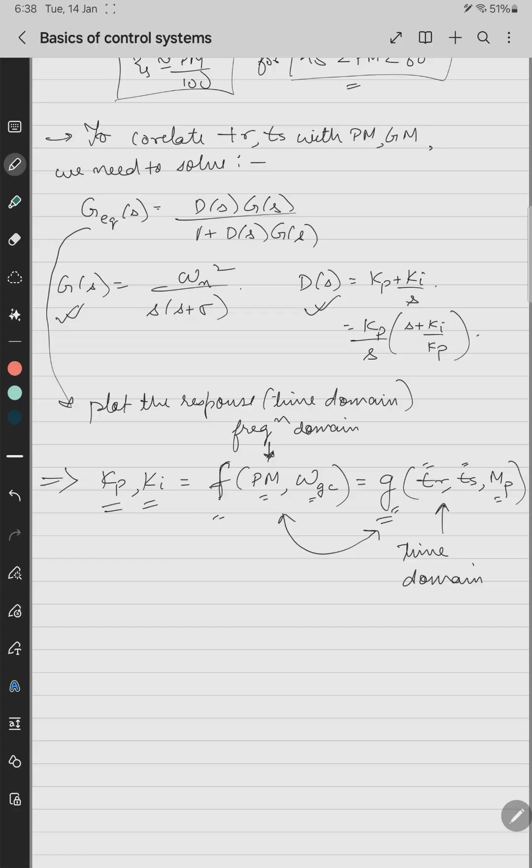But that will not help us. We want to tune Kp Ki based on either F or G. So basically it is a tedious task to correlate phase margin and omega GC with TR and TS. But I have just given you an idea of how to correlate PM and omega GC with MP, peak overshoot. Correlation you can do anytime. You can do the correlation just to verify that your solution is same for both the time domain and frequency domain, that is, for the same Ki Kp, you are getting the desired rise time, settling time, peak overshoot.

So these parameters, just like time domain, the parameters phase margin, omega GC are known to us, or we have to select it and then you have to tune Kp and Ki. This is the approach in the frequency domain.

And for frequency domain, we consider OLTF, that is D of S into G of S, is considered in frequency domain. So for controller design, we take the open loop transfer function, because we know whatever is the gain margin and phase margin, or whatever is the gain or phase to be added in a closed loop response to be stable, that is to be added by the controller. So that's why we have to take open loop transfer function for tuning the controller parameters.

So now the last topic of this lecture is the generic approach for PI tuning in frequency domain.

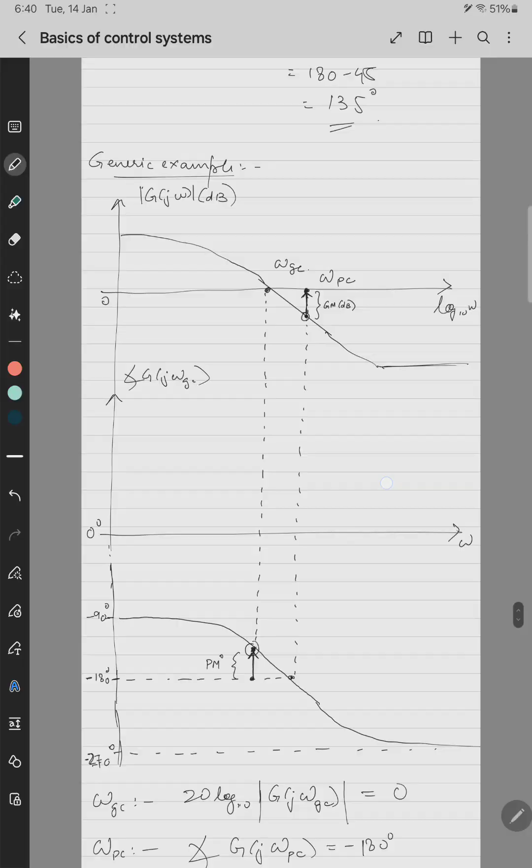Okay, so as I told you, as I just gave you example of a first order plant and I have drawn the Bode plots and all. So in that case, omega GC, now this is for a plant, right? This is mod of G of J omega GC at J omega in dB and angle of G at J omega. So basically these are for the plant. So basically omega GC is a function of plant, is the nature of the plant. Now you can't change the nature of the plant. You know what is a plant. The plant is already modeled in Laplace domain, that is the transfer function.

Means for a given plant, omega GC is known, or basically you have to assume omega GC, the gain crossover frequency. That depends on the application, like for a switching application and all. So step 1 in any generic approach is to assume omega GC, which means basically assume omega GC, then draw the Bode plot, tune your Kp Ki, then draw your Bode plot of the open loop transfer function, and then see that the gain crossover frequency is matching with the expected phase margin.

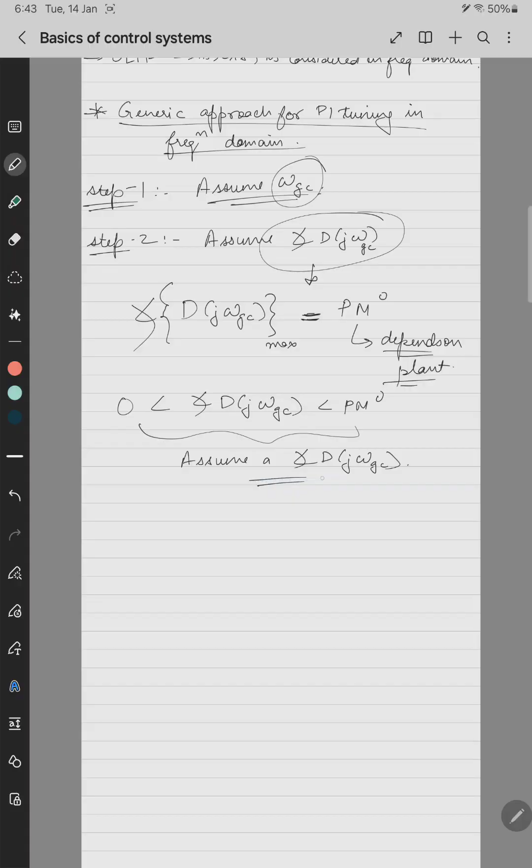Step 1 is assumption of omega GC. For omega GC, basically what we do for power electronic converters, omega GC is omega switching by 10, or omega switching by 100, or omega switching by 200, omega switching by 1000. This all we can assume, that depends on the plant. So in the next lecture we'll take a classic example of a dual loop or single loop control of any DC-DC converter, and then I'll tell you how to assume omega GC.

So this generic approach of tuning the PI controller is based on the assumption that you know what is omega GC and you know what is the angle of D at J omega GC. Then comes step 3, tuning Kp and Ki, or basically finding Kp and Ki.

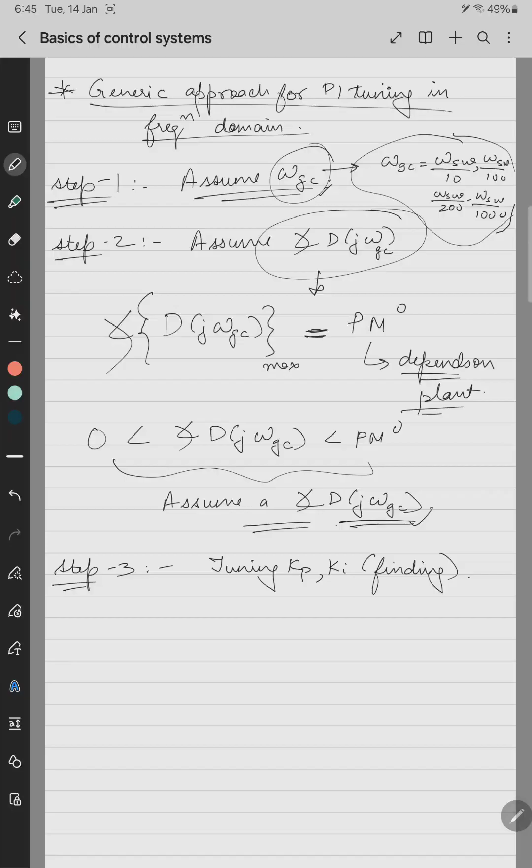So each set of these two values, omega gc and angle of D at j omega gc, will have a unique set of Kp and Ki. If you change them, they'll also change. But Kp and Ki usually are a single value, so we have to get only a single value of Kp and Ki.

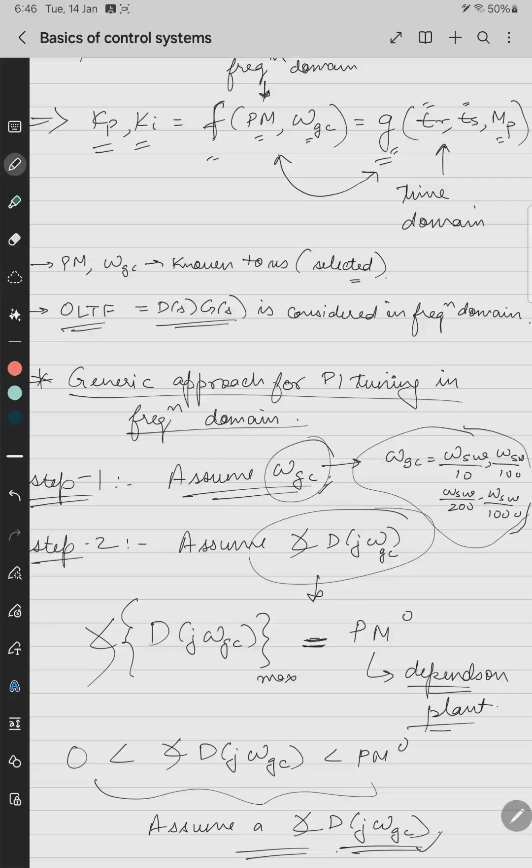At a given omega gc and angle of D at j omega gc, then comes the crucial step 3. As I said, for tuning PI parameters in frequency domain analysis, you take OLTF, that is this into this.

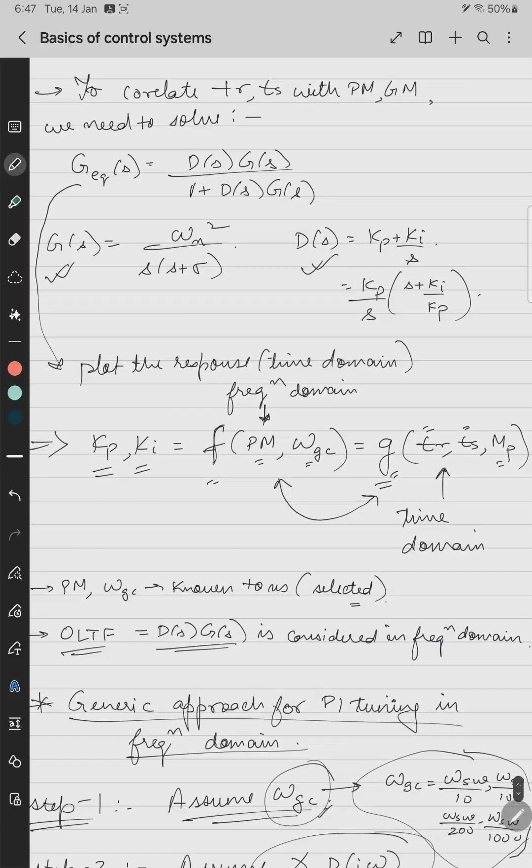So I'll write G open loop of S, that is D of S into G of S. What is D of S? Kp by S into S plus Ki by Kp, into G of S, generic plant. I hope it's correct. Where is that? Yeah, Kp plus Ki, so S Kp plus Ki by S. So Kp by S and Kp by S into S plus Ki by Kp. Yes, this is correct, so this is the thing.

Now I told you phase margin is what? The angle that can be at phase margin for a plant, means, so I said earlier that phase margin is what? Angle of G at j omega. Phase margin is at gain crossover frequency plus 180 degree.

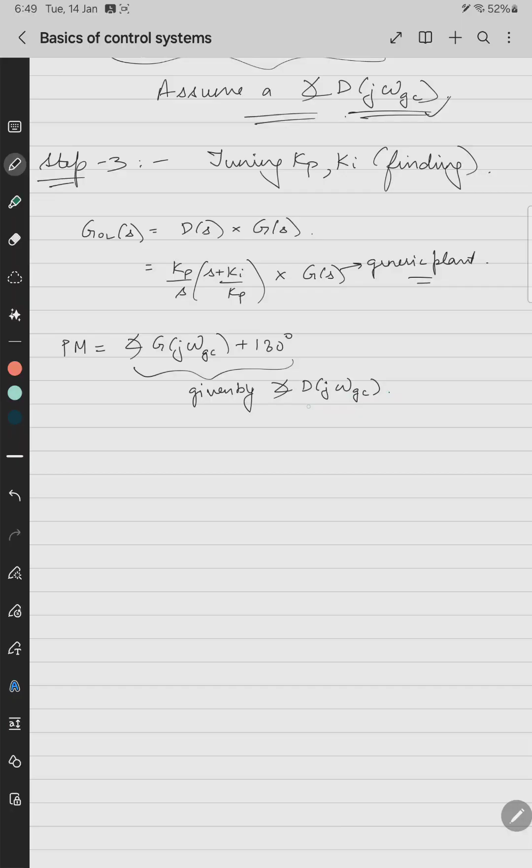Okay, this is the margin, but who will add this angle? This is given by the controller, given by angle of D at j at the same frequency it should give, right? Omega gc. So what I mean to say is, this maximum value of this is this. Maximum of angle of D of j omega gc is this angle of G of j omega gc plus 180 degree. Okay, so let's say we assume some this value.

So maximum value of this is this. So similarly, what is the phase margin for OLTF? The phase margin for OLTF is angle of G at j omega gc plus angle of D at j omega gc plus 180 degree. Same logic, just replace this, it's D of S into G of S.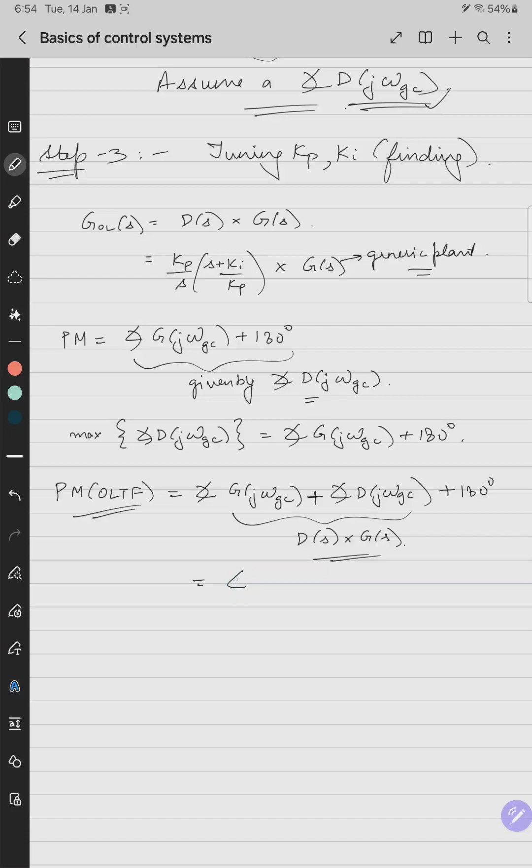So this is the assumed phase margin of the OLTF. Just replace the plant with OLTF plant, D of S into G of S, and for OLTF angle just gets added, right? Angle will just add the angles. Okay, so what is the phase margin of OLTF? Or you can write angle of G OLTF at j omega gc plus 180 degree.

Now what is this PM at OLTF? This is the one which you are assuming. So this is the one which you are assuming. You are assuming this angle. Assuming the angle which is given by the controller is nothing but the phase margin of OLTF. So you are assuming this. Step 2, you are assuming phase margin at OLTF like this. So this is phase margin at OLTF.

I'll just write PM at OLTF equals to PM star, which is assumed, which is less than angle of G at j omega gc plus 180 degree. This is the maximum value of PM star. Okay, so from this equation what you can write? Angle of G OLTF at j omega gc is PM star minus 180 degree. This is equation number 1.

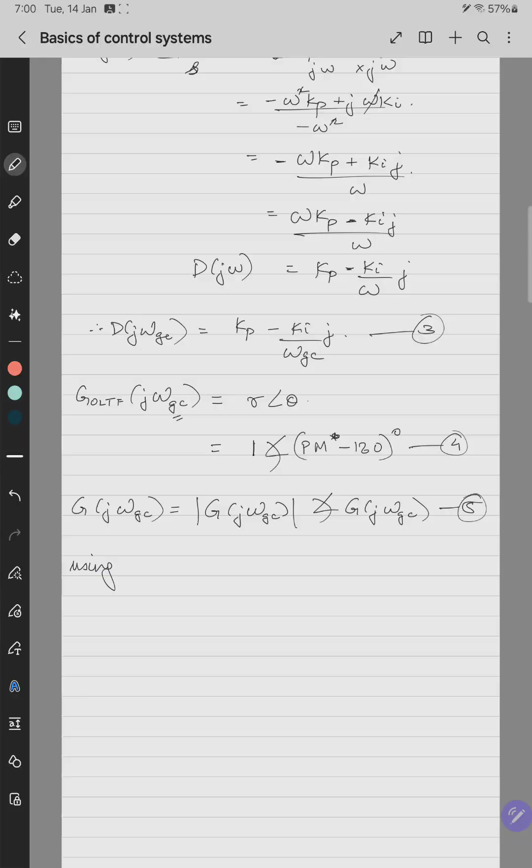So then using 2, 3, 4 and 5, or using 2, 3 and 5 in equation 2, what we'll get is this. So I can write D of j omega. Now you'll understand why I've written here in polar coordinates and here in rectangular coordinates.

D of j omega gc using equation 2, D of j omega gc is what? G OLTF at j omega gc divided by G at j omega gc. This is equation number 6.

So I'll write using 2, this is equation 6. Then putting what? 3, 4 and 5 in 6. You can get the Kp and Ki value easily. I'll tell you how. Now here it is in denominator.

r1 at an angle of theta 1 divided by r2 at an angle of theta 2 will be what? r1 by r2 at an angle of theta 1 minus theta 2, right? We'll use the same principle here.

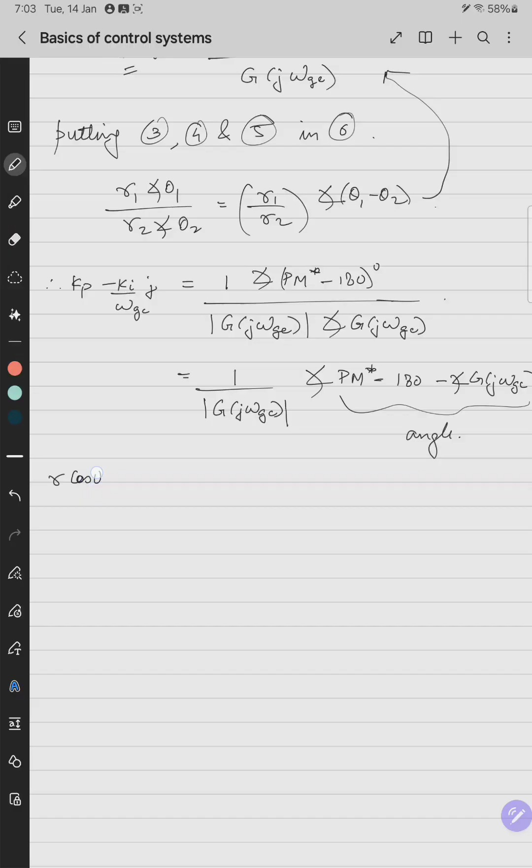Okay, so using the identity r cos theta plus j sin theta is r at an angle of theta, thus therefore what is the RHS? Yes, r at an angle theta. We'll just convert it to rectangular coordinate in the RHS.

So it will be r cos theta plus j r sin theta, where r is 1 by mod of G of j omega gc, into cos of theta, where theta is PM star minus 180 minus angle of G at j omega gc, plus j sin theta. Okay, then equating

LHS to RHS, what we'll get? Kp, right? What is Kp? Kp is cos theta by mod of G at j omega gc, and minus Ki by omega gc equals r sin theta. So Ki will be minus omega gc into sin theta by mod of G at j omega gc.

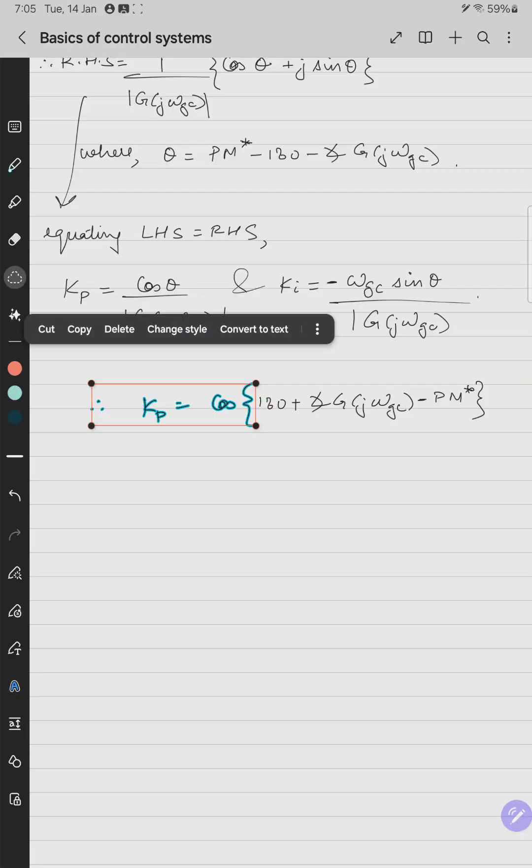Divided by mod of G at j omega gc, and Ki is minus omega gc. So the minus sign is already multiplied there, so it will be omega gc sine of the same angle: 180 degrees plus angle of G at j omega gc minus PM star, in degrees, divided by mod of G at j omega gc. This is how you tune Kp and Ki for a generic plant.

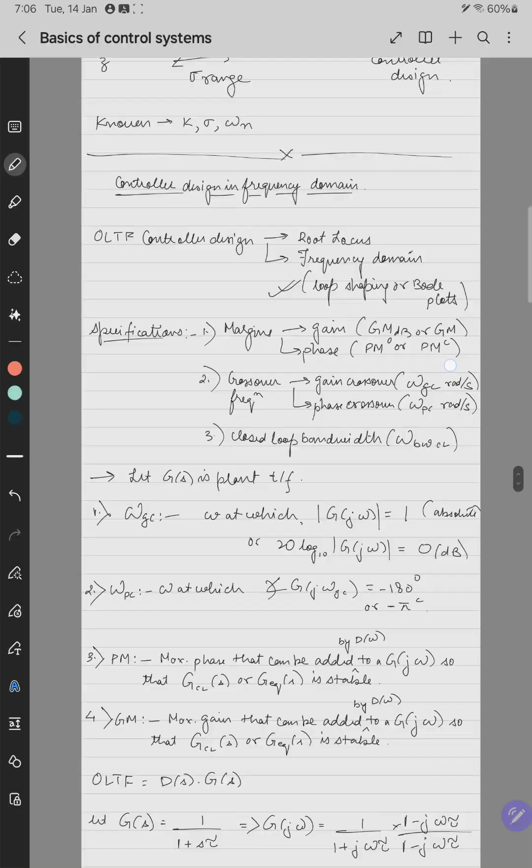Okay, so in this lecture we started with basics of frequency domain analysis. In frequency domain OLTF, we saw the specification of frequency domain margins and crossover frequencies.

Then we took an example of a first order plant, a basic low pass filter. We drew the Bode plots and saw the gain margin, phase margin and crossover frequencies of it. Then in a generic example Bode plot I showed how to denote the phase margin and gain margin in a graph.

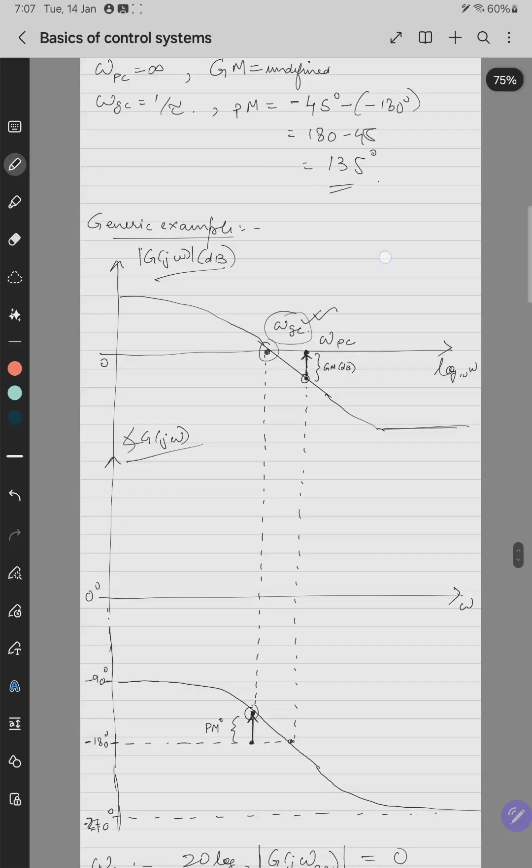Then their mathematical expression, a generic mathematical expression for a plant for the crossover frequencies and margins. Then I also told you how for an nth order generalized plant, to draw the Bode plots, find the corner frequencies and change the gain accordingly, and how to shift the phase plots up and down using this.

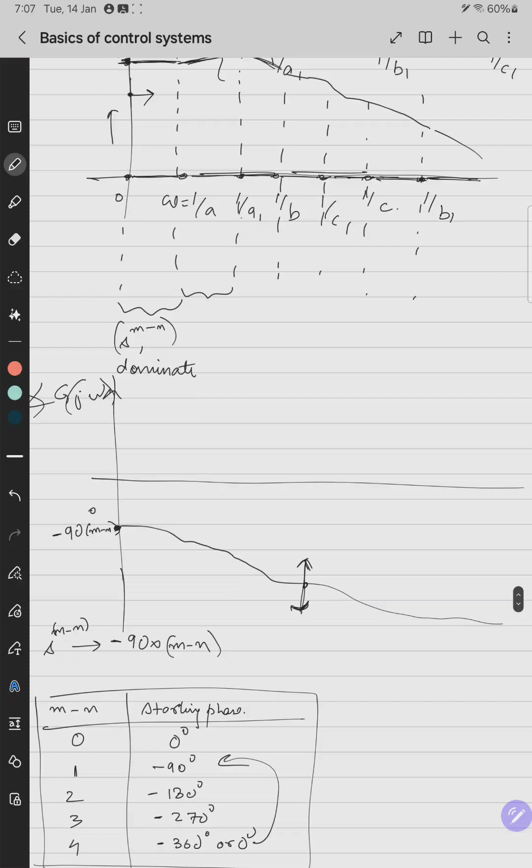And why gain margin and phase crossover frequency are not much considerable for stability analysis, and only phase margin and gain crossover frequency are needed. That also I explained in this example.

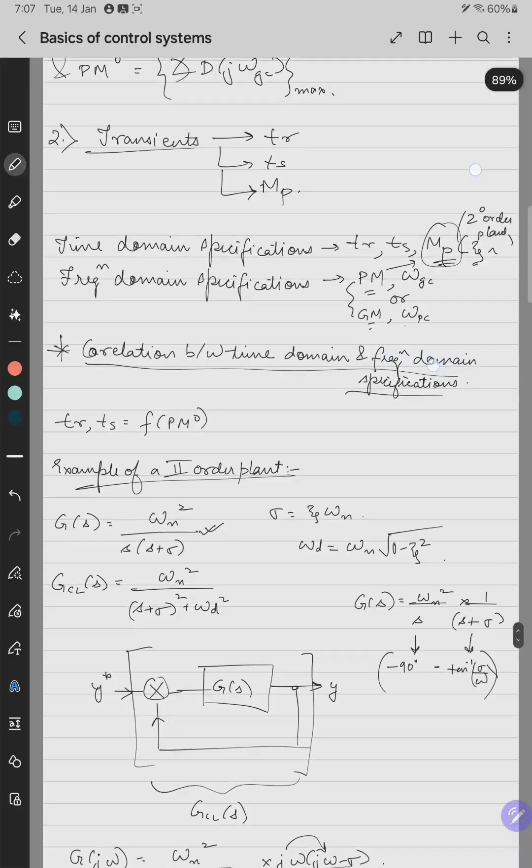Then the controller aspects, just like stability and transient requirement. I correlated the time domain specification, which is only the peak overshoot, with respect to the frequency domain specification by correlating them as a function of each other, and then some conclusion is drawn.

Like in a small range of phase margin, the phase margin versus zeta relation is almost linear, and phase margin versus peak overshoot relation is almost inversely proportional. So if you increase the damping, phase margin will increase, or with increase of phase margin, damping will increase but peak overshoot will decrease. Similarly its effect on rise time and settling time you can see by doing the closed loop analysis.

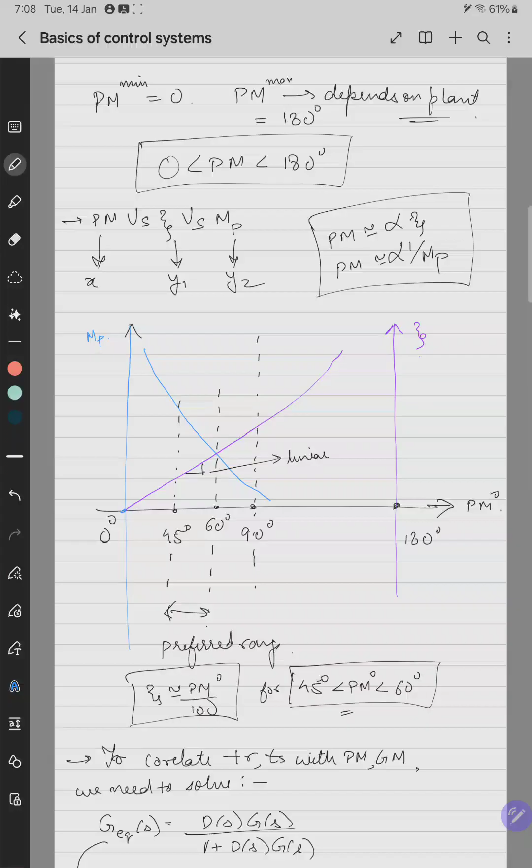So if the controller is fast, meaning the frequency is high, the gain crossover frequency or the bandwidth is high. Bandwidth is the frequency at which the closed loop Bode plot gain magnitude is 1 by root 2 in absolute, or minus 3 dB in decibel scale.

So then a generic approach to tune the PI parameter for any generic plant order, we discussed step 1, step 2 by assuming a gain crossover frequency and assuming the maximum phase which a controller can put, or the phase margin, so the angle put by the controller is limited by the phase margin of the plant, which is nothing but the phase margin of the open loop transfer function.

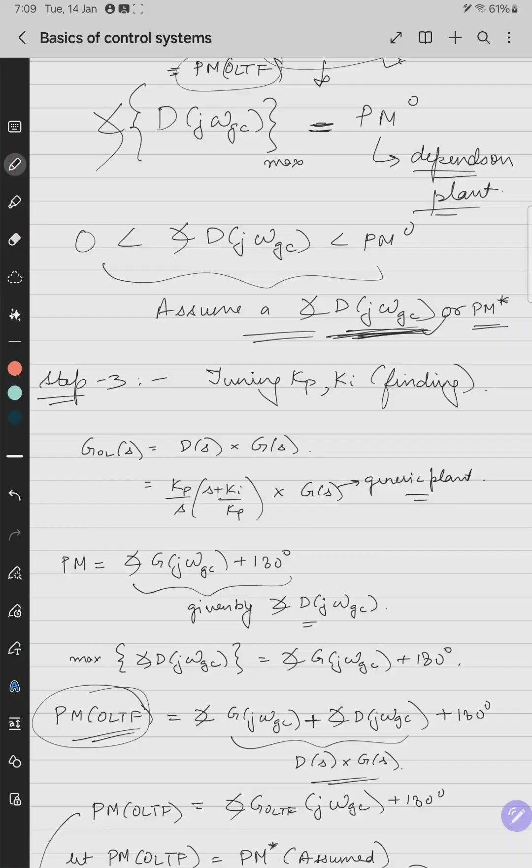Correct. So assuming in step 2, angle of D at J omega G is nothing but assuming PM star. PM star is PM at OLTF. Doing this, we did it. So basically whatever is the definition of the phase margin and gain margin will be the same for a plant and for an open loop transfer function, that is G into D, and the same is valid for G as well.

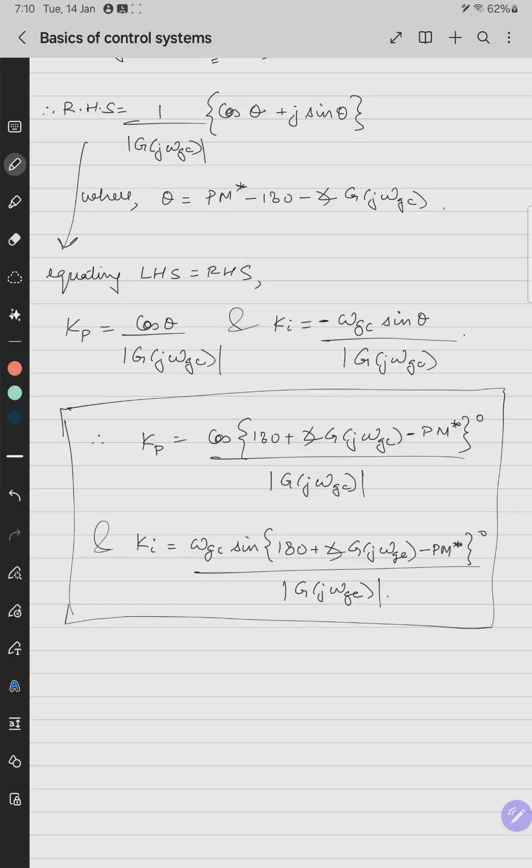Then based on this, using polar and rectangular coordinate transformation, we found the Kp and Ki values for a given gain crossover frequency and phase margin. Phase margin you have to assume, and gain crossover frequency you have to assume. This is the Ki Kp parameter.

And once knowing this Ki Kp, if you draw the Bode plot of the open loop transfer function, you will get exactly the Bode plot with the gain crossover frequency happening exactly at omega Gc, and you will get the same phase margin as what you assumed here for the OLTF.

So this is how to verify that your Kp Ki are correct or not for a given omega Gc and PM. So using this Ki Kp, substitute it in d of s, substitute this kp and ki using this formula in d of s.

Then give a command in MATLAB, Bode of d of s into g of s, and see the gain, or you can do margin. There is a command margin of d of s into g of s. See the gain and the phase plots. In that plot you will see that whatever is the gain crossover frequency, whatever is the phase margin, that exactly matches with the one which you assumed, which means that the solution is correct.

And then here we get omega gc and pm, and then we verify like this. So if the plant changes, the assumption also slightly changes, but you know what is the range in which you should put the pm max, or pm star should be greater than 0, less than angle of g at j omega gc.

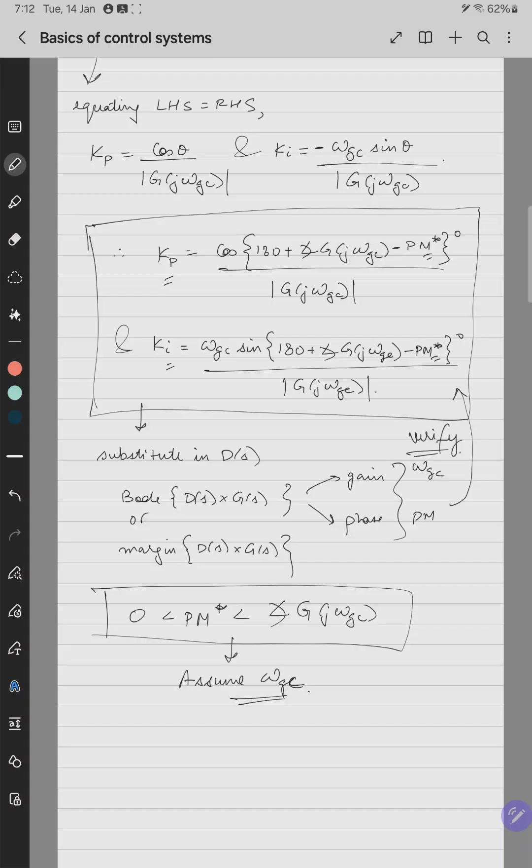So that's it. In the next lecture we'll see the example of PI tuning using an actual DC-DC converter, using single loop control, current control, or dual loop control, inner current control, outer voltage control, and we'll discuss it further.